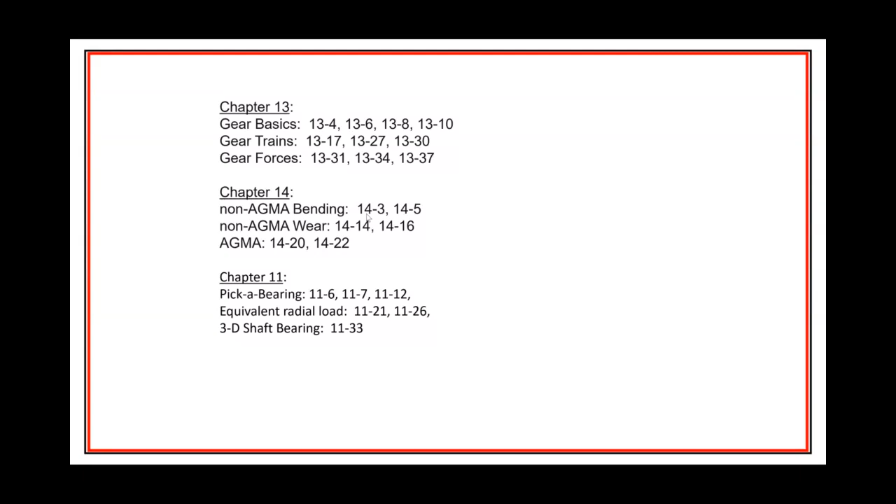All right, so these are the problems. Yeah, okay, so I have the problems listed out from the suggested ones. And boy, the clarity isn't all that great, definitely not very good resolution.

Definitely not doing this problem. Okay, so we're not doing this problem. It just happened to be on the list, man. I was just using the list.

This is a challenging one right here for planetary gear. You know, planetary gears are on the table. Another planetary gear, also a challenging one. I think the big challenge is trying to figure out what this diagram means. That's the hard part.

I'm just going to cycle through these, kind of see what this is, the menu, and then you guys can make requests if anything jumps out at you. So maybe consider that as we're walking through. Once again, I just tried to pick out some problems where I thought, hey, this would be the kind of thing that I want you to be able to do, but not necessarily representative of this is the exact problem.

If you've had me before, you should recognize that I don't just give away exactly what you need to do for the exam. If you want to prepare, the question is can you do something.

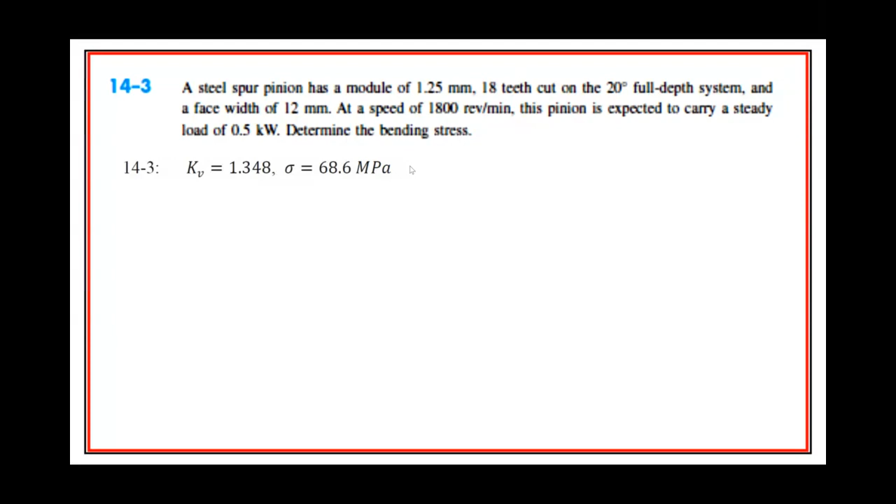So I was talking while going through some of these. There's usually chapter 4, so there's a chapter 13 thing, and yeah, this is a sort of basic problem. We did several problems kind of like that. Here's some stress problems, and this one you could do either way with AGMA or non-AGMA. Same thing true with this.

There's another stress problem. Look, Osama's got his hand up. Sir, where do we find these slides? You find them right here, my friend.

Okay, so they're not in Blackboard? Okay, yeah, well, they're problems that are going to be... let's see, I'll show you where they are. I'm sorry, I was just joking around, man.

Right in the beginning when I started here, let me see. I'll try one more time there, Nathan. Let's see what happens here. I apologize, Nathan, I just don't know what's causing that.

If you go here, bring it over here, boom, and if you go to exam prep, these are the problems right here. So that's what I'm doing right there. So you don't need the slides for them because you have the book, right? That's these are the... what is that thing right here? You have 151 registry issues on your PC.

That's great, thanks man. And then we also have answers, right? So there's the ones that say, yeah, okay, so these are suggested problem answers. And here's a suggested problem. So you get those from the book, and here's the answers from right there. So that's what these are.

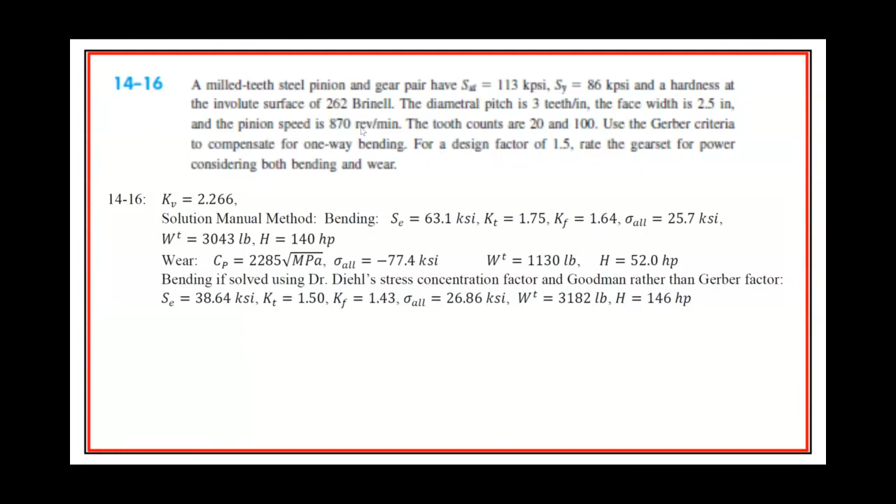Yeah, I think this is an AGMA problem. Could we do one of the planetary gears if we want to start? Okay, absolutely.

More spur gear stuff right there, an AGMA method.

So we got some bearing problems going on right here. And this one I just threw the answer right in there from the solution manual. I'm doing it right there too. Anyway, so we can look through some more of this.

I was actually looking for, okay, here's exam practice problems, right? So can we do one that consists of FBDs, maybe like 3-D shaft? Yes, absolutely.

Let me go back up to, sorry for the delay here.

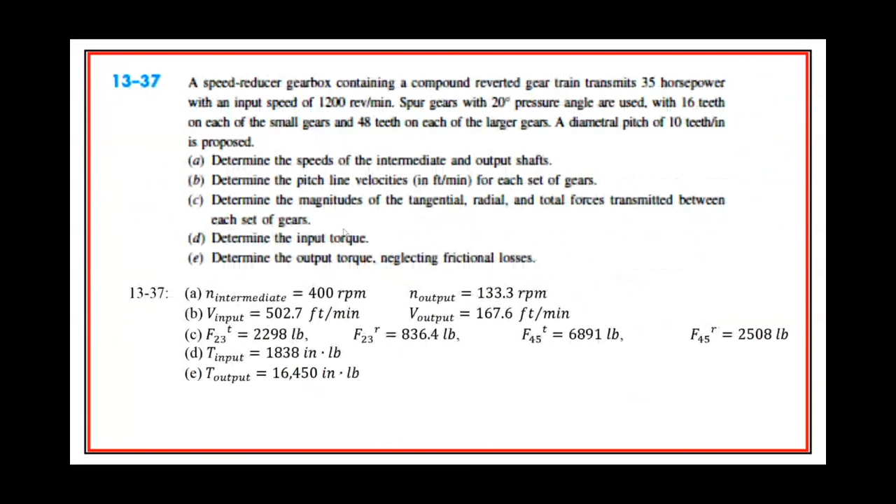So let's try one of these challenging planetary gears from the textbook. There you go, one of these two right there, this one and this one. They don't have a whole lot of them.

So I'll try this one. All right, so the gear numbers for the gear train that we see right here are 20 teeth. For this guy's got 20 teeth, and this one has 16 teeth.

As we're going through here, we want to check out some of the diagram here. You can see there's a dashed line like right there. That means that this is spinning freely on this shaft, right?

And then it goes to gear 4, which has 30 teeth. But you can see because of this little fillet right here, they're implying that this shaft and gear spin together. And then you can see the dashed line through here means that this gear is attached to, so 4 and 6 are fixed onto the shaft and they'll rotate together.

And 6 has 36 teeth, and then we come down to 7 right here, and you can see from this dashed line that this shaft spins through 7, and you can see from this little black gray area right here that 7 is actually fixed, right? And 7 has 46 teeth.

Do I not have this written down? Okay, well, we'll just have to move this thing over. Well, I gotta see, probably I'll bring it over here.

All right, so I don't necessarily have to draw the whole thing out, but I like drawing things out to help me think my way through the problem.

All right, so let's see, this has got 30 teeth, I'll call them T's. And this is 6. All right, so this is 4, and this is 6, and this is 36. And it's going, here's the carrier for the thing.

And then they have this gear right here, and he rotates along those lines. And coming through here, and then here's, I kind of made the thing too big, so there you go.

So this one is fixed, and this has what, 46 teeth, and this is sort of the shaft that we want. And lastly, we have a gear that looks like this right here, and he's right here.

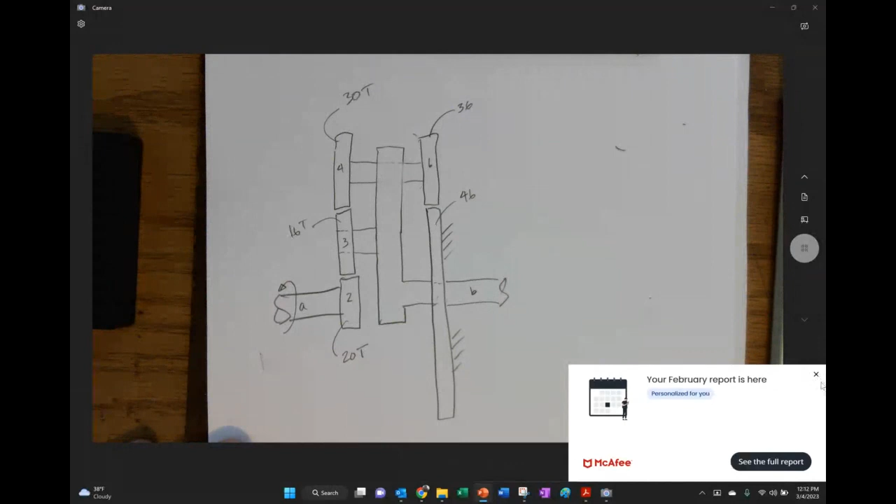So I'll say that this NA is 10 RPM. So I'll start out with my E and march through, right? So there's my first gear. And so we say that's going to be, this drives this one right there. So N3 is driven, and then 3 drives 4.

And then 6 drives 7, even though 7's not rotating, right? That's just the way that we're referring to the thing. Noteworthy that 3 would cancel each other out.

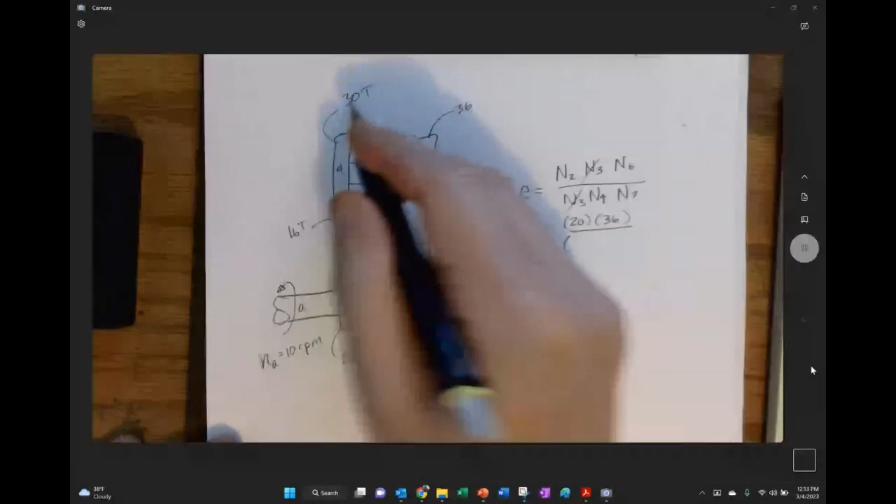So you take 20 teeth times the 36 and divide by the 30 and divide by the 46. So: 20, 36, 30, 46. And we should have 0.5217 as our gear train ratio.

And now we want to go to our book in chapter 13 under planetary gears, or actually I'm not sure there is a planetary gear section. I think it's just in gear trains. And there you go, and we have our main equation here at the bottom.

This guy right here, I'll write him down: E equals NL minus NA divided by NF minus NA. And now we got to see how that applies to our situation.

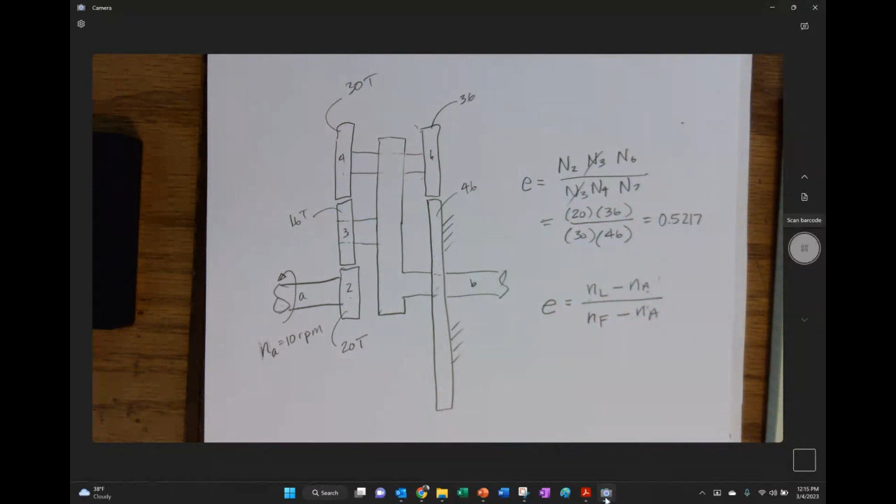Well, the last gear in this train is going to be the 7, even though it's not rotating, so it's going to be 0, right? And the arm is actually this output, you can see that's the arm onto the thing. And so this is the input right here, the first. So you got first and last.

So we go 0.5. Oh, we have to decide. Oh, by the way, we need to assign a sign for this, right? So we have to decide, is the input and the output turning in the same direction? Because the sign of this will affect our result.

So what I've been told is you hold on to the arm and then you see which way the last gear would rotate, and that determines the sign of this, right? That's like a rule of thumb approach to this that I've heard from multiple sources. I think it might be said in this book, but it's just a good way to remember. So hold the arm in place and see which way the last gear would rotate. Even though this is fixed, we're only doing that for the sign here.

So if this was fixed, all right, let's just march through this and do the little thing. You have to kind of picture what this thing would look like. I could try to sketch it if that would be helpful, but they're going to be superimposed on top of each other.

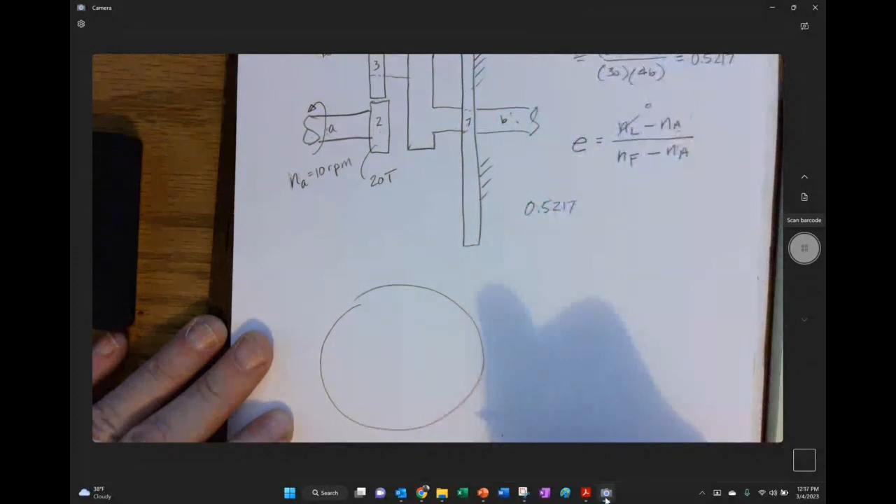But if that was gear 7, sorry, I never labeled it 7, right here, you would see that we'd have, I'll make this one much bigger, that would be gear 6 right up here. And then of course gear 4 would be right here, right? And they rotate together. Gear 3 would be right here, and then gear 2 would be right there, right? So hopefully you can picture this.

So I wrote, this one goes this way. This is 2, and this is 3. This is 4, this is 6. Where did 5 go? Oh, they numbered the arm for some reason. I don't know why, don't ask me why.

All right, so we could see that 3 would go clockwise. I'm assuming 2 is going counterclockwise, and I'm looking from this direction, by the way. Right, so this is going that direction, so this has to go that direction. And therefore, you know, I'm going to draw the arrow.

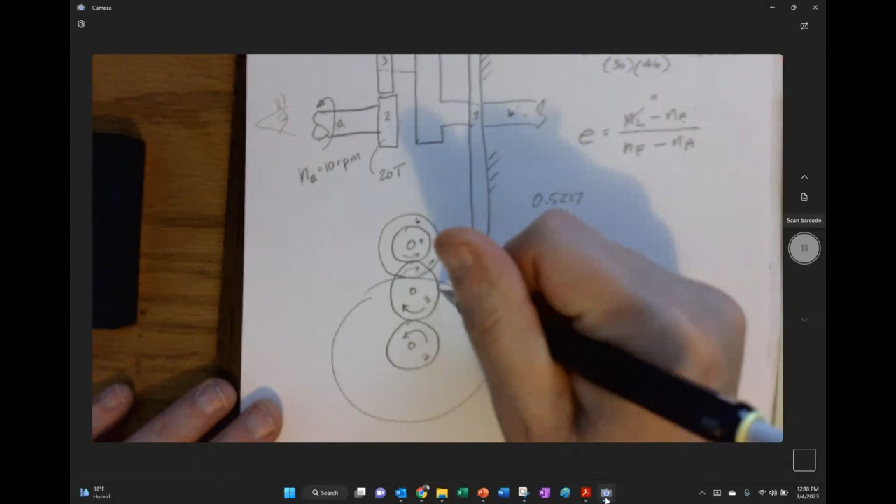This is the arrow for 6. And then, did I do that correct? I'm starting to think I did it correct. It says, oh no, okay yeah, we're okay. So here we go. So this actually should go in the opposite direction of this, right? So I think I did that correct.

This is the way to assign the sign for this thing. You could also see, by the way, because we don't have another, and so we're saying that's going to be negative because this goes the opposite direction right there. So we've decided that must be a negative value. So when we go down here to plug it in for E, we'll make it negative.

Another way that you could do it, because this does not have a gear with internal teeth, these are all external teeth, it would be true: there are 3 stages of gears, and every one of them is negative. So it makes sense. You have negative times negative times negative, and you get a negative result. So that is also true.

What messes you up in that respect is if you have internal gears, right? Like a ring gear, that does not behave the same way.

All right, I can't see at the same. I have 2 monitors, but I'm using both of them at the same. So let's see, could you do? Okay, can we do one? Or are you putting your hand up? I can't tell. Okay, like for an... did they tell us the shaft B doesn't rotate, or we assume that?

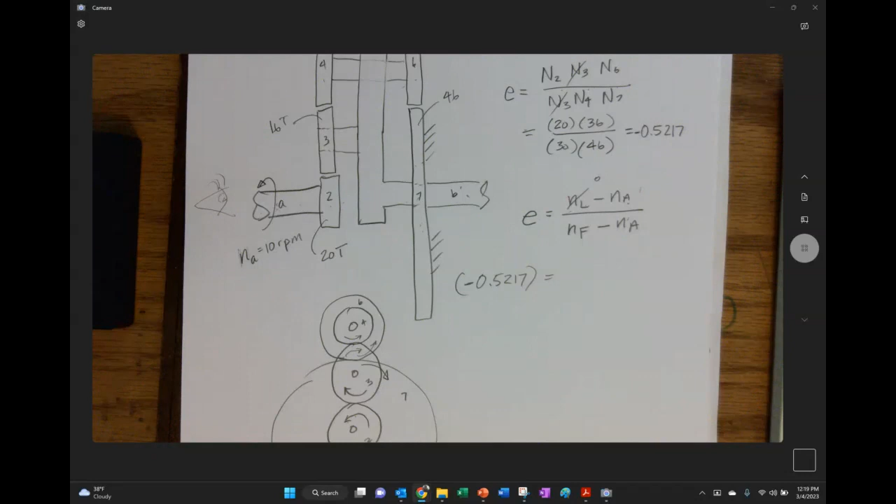We tell that shaft B does not rotate. Okay, shaft B does rotate, but for the purposes of trying to apply the equations that we have for this, what we do is a hypothetical. Let's pretend that it rotates, even though it indicates that it doesn't, in order to establish what the gear train ratio is going to be. So we determine whether it's positive or negative, as if it could rotate.

And now we go ahead and we apply what actually is taking place with the gear train equation.

So now we have that negative, we can go 0 minus. This is the thing we want, right? The arm. And first we're going to say it goes 10 RPM, and we're going to go to the arm again. Now we have a little bit of algebra to do, and I'm not really great at algebra, so I usually don't trust myself to skip steps. I will methodically go through this.

All right, are you putting your hand up? Please go ahead and put your thing in the text, I don't know. You could do that. All right, doesn't matter, I just can't quite juggle these things sometimes. Just two monitors, and I need to look at one of them.

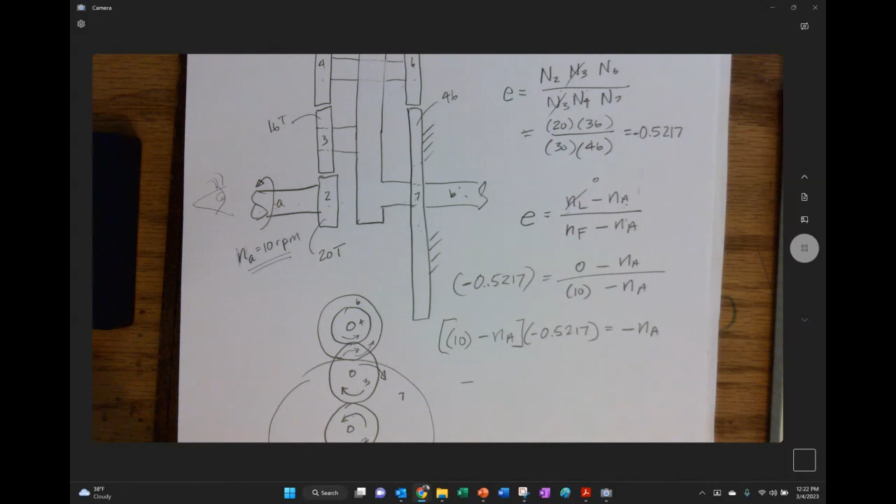Well, I just didn't like the way the problem asks, if you turn it 10 times, how many times does A turn 10 times. I'd rather think of it in terms of RPM, so I just gave it an RPM instead. I've seen students get confused because we only did a problem where we turned it 10 times, but now you're asking for a speed. And I'm like, all right, it's a speed. I can't win, I'll confuse everyone no matter what.

So this comes out to like 5.217 plus 0.5217 equals negative NA. I needed NA right there, so I bring the thing over to the other side. So we got minus 5.217 equals, and now we're going to have minus 1.5217 NA. Did I do that right? You guys can catch me anytime you want, please, to tell me if I screwed it up.

But now, okay, that's good news because we know the answer. 10 times that and flip that guy over and add 1 to it. Boom, and then divide, and do we get a positive 3.429? Call it RPM. And the slide we had, bring it back over to the other screen here. Yep, we got the right answer. Woohoo, off by a decimal place.

But anyway, so that was sort of the general process. We could do another one real quick because they're not long problems, just to try to organize how you approach this. I should go back. Okay, does anybody have a question about the one we just did?

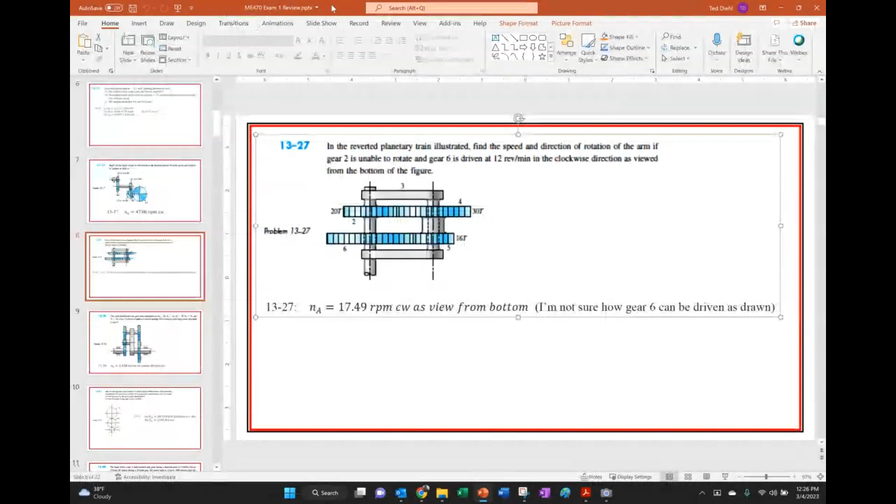But gear 6 is being driven in the clockwise direction as viewed from the bottom of the figure. So I'll try my best, it's a weird one. It's a weird problem.

So what was this previous problem? I should label these things. This was 1330, so I'll label that 1330. I'll put you up here. So what is this? 1327.

I don't like this problem at all. Try to draw the thing out, this helps me think. I'll draw that as a thin line right there. So there's the arm, start out with the arm here.

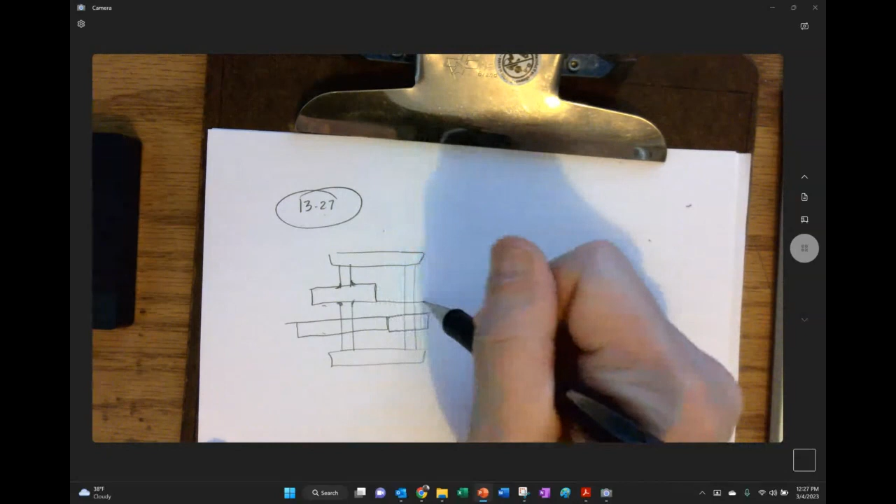And we have gear 2, which is moving with this shaft, right? So they show like a little thing right there to indicate that gear 2 is attached to the shaft. And here's gear 6 - well, I didn't make it big enough here, it'll have to do. And then you have this gear and this gear, but they are attached to this shaft right here.

And you almost have to erase some of these lines here. All right, so this is 6, 2. Here's the shaft, and now I've often thought that this should - I feel like it should be, but I think this is connected. They didn't put the little symbol signs on there to make it look connected, but this is definitely connected.

And I'm regretting picking this problem. This guy is rotating through here, he's number 5, and here's number 4. And this guy has 16 teeth, he's got 30 teeth, he's got 20 teeth. And they didn't tell us how many teeth 6 has.

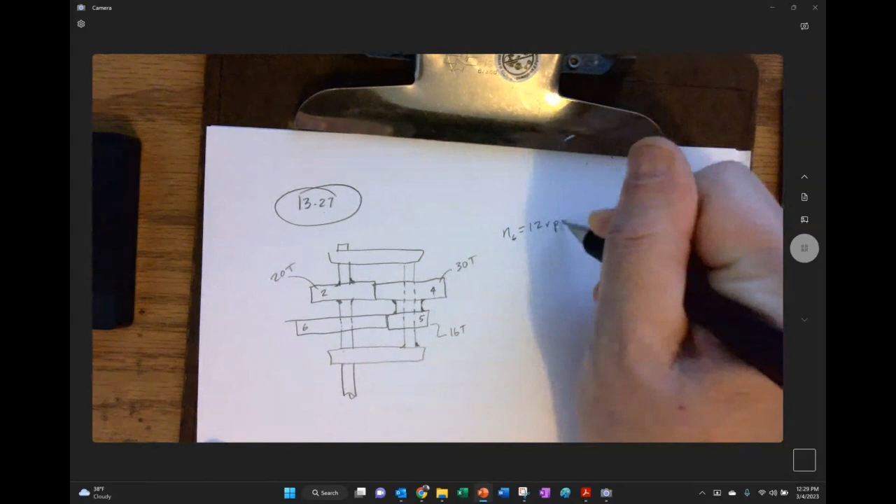The plan is to find the direction. N of 6 is 12 RPM, but I think we can figure it out. Okay, so they didn't tell us the number of teeth of 6, but we can figure it out from teeth math, right?

So the difference between here and here, if this has 20 teeth and this has 30 teeth, then there would be 10 teeth - or you could think of it this way. By the way, the teeth math, recall that if we pretended that the pitch was equal to 1, then the diameter would be equal to the number of teeth. Are we okay with that?

Would you like me to repeat that? You're going to pretend P is equal to 1, therefore N is equal to D, right? So if we're doing that, we can pretend that this 20 teeth means that this thing is 20 inches in diameter. That means there's 10 inches right here.

And that means that this is 30 inches in diameter, so that's 15, right? So the center to center distance between these two shafts must be - well, you could do it this way, you go 20 plus 30 divided by 2 right there. So anybody want to help me out with that math? It should be 25, right? That's 10 and that's 15.

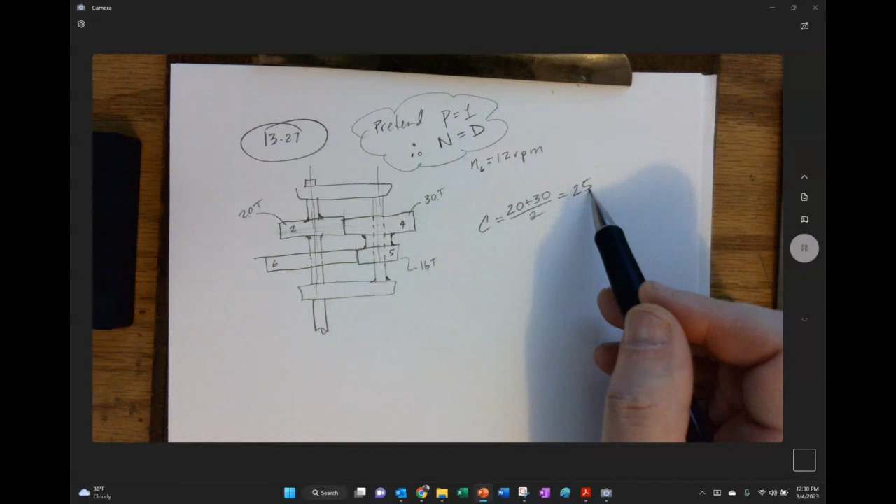Yes, yay. So this is 16 teeth right here, therefore that's going to be 8. So therefore, 25 minus 8 is going to be 17. Is that right? Therefore, yep, the number of teeth is going to be 34. Did I lose anybody on that?

So here we assume that n equals d, just to make life easy. I'm only suggesting that's a good way to think of it. We could write it out the long way, but I think it's better when you assume it like this—it's much easier to solve, much easier to just consider it in those terms.

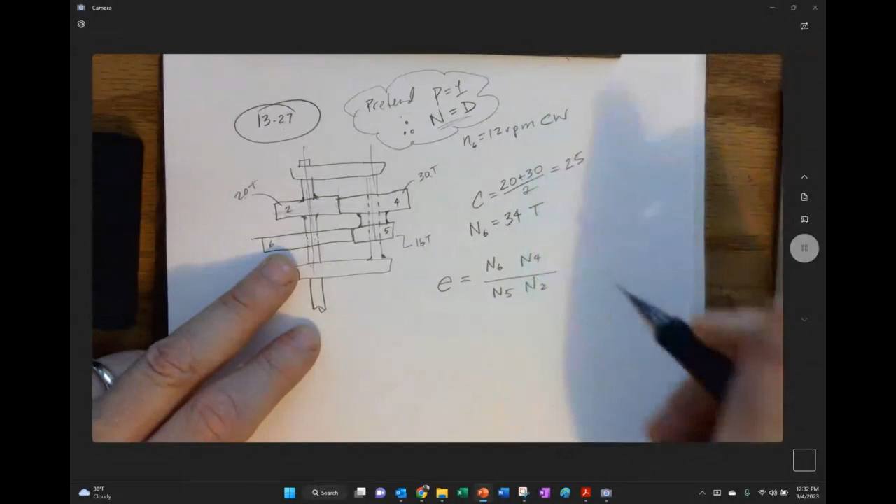Before I forget, this is clockwise. So let's look at the gear train ratio coming through here. Since they described 6 as being the input, we'll say that's where it starts. So 6 is going to drive 5, and then 4 is going to drive 2. So we can have 34 times 30 divided by 16 and 20.

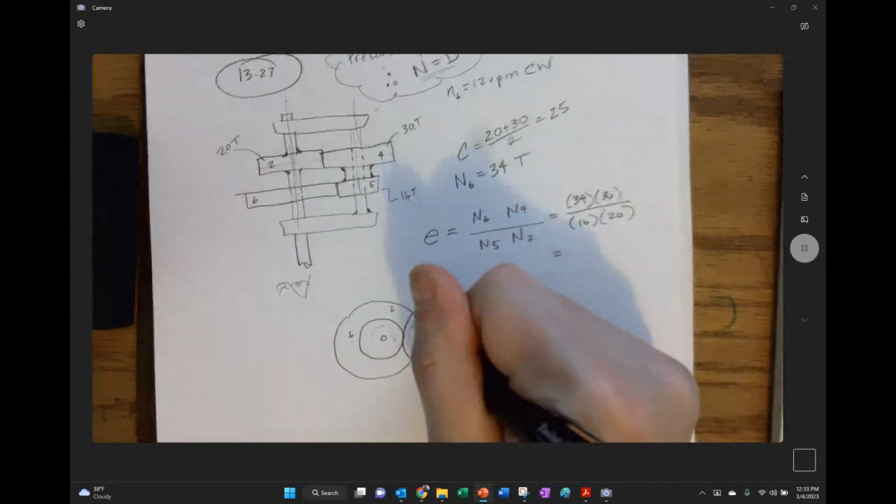We're going to play that same game we did before—let's look at the diagram from this direction. It's a little weird, but we could take a look: here's 6, here's 5, here's 4, and here's 2. They're saying this is going clockwise. It's 6 that's actually moving, so 6 is going that way, therefore 5 is going that way, therefore 4 is going this way, and therefore 2 is going that way.

So input equals output, therefore this one's going to be a positive value. 34 times 30 divided by 16 divided by 20 is 3.188.

And then we use our main equation right here—once again, with my short attention span I have to look at this thing again. Let's see what's being held in place. 2 is unable to move, right?

So find the spin direction of the arm. It must be...

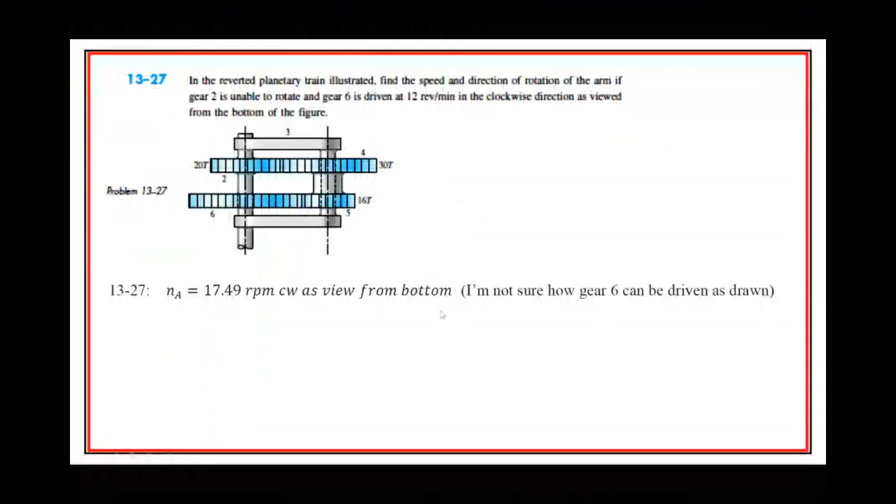I'm a little frustrated right now, just one second. It must be that this shaft passes right through there, and it passes through right there. Take a look at the image again—I'm actually sorry for picking this problem, it's Shigley's fault, not mine. But you see that gear 2 is definitely attached to that shaft, right? We're all in agreement. And if 2 can't move, you don't see an attachment like that thing right there.

That's implying the shaft is attached to 2, and there isn't any right there, so this arm must be able to rotate—you see it's not there as well. They really should be drawing dashed lines through right there. Other instances show that thing right there and right there, indicating this shaft is attached right here, but this one's not. So in my opinion that's an indication it can rotate.

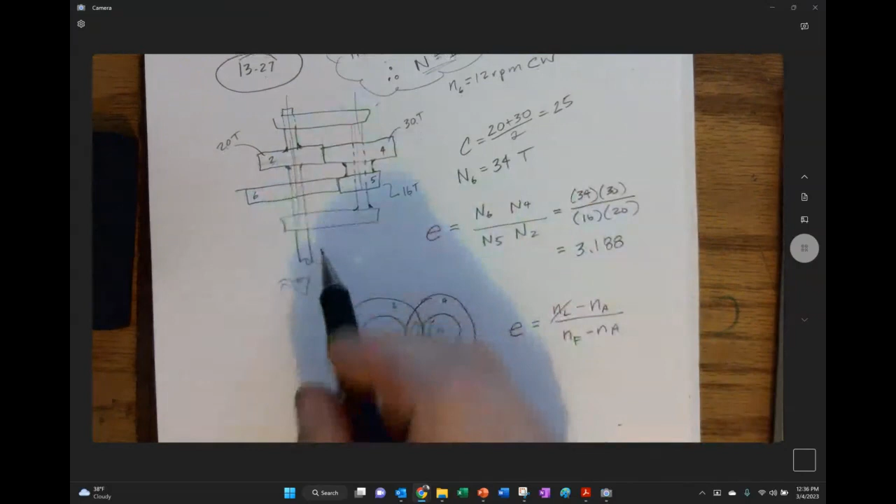So anyway, I'm going to consider 2 the last gear, since I started calculating with 6 and ended up at 2. So that's the way I'm going to go with it. 2 can't rotate, 6 can—we'll call that the first, and it's the arm we're trying to find. So we'll say 3.188 equals 0 minus the arm, and this was the 12 RPM and the arm.

We've got to do the same thing again right there—we're going to go 12 times 3.188 minus 3.188 NA equals negative NA. So NA, which is the arm, we're going to have 12 and then 3.188, and it's going to end up with a negative value. We're going to add it onto there, so divide, and I get 17.49.

I'm not feeling a high degree of confidence that I didn't screw something up along the way. Oh, but I got it right—and it's negative, so it's going to be counterclockwise. Oh no, clockwise. I'm not sure how gear 6 can be driven as drawn—yeah, that's me saying that in the past right there. Clockwise.

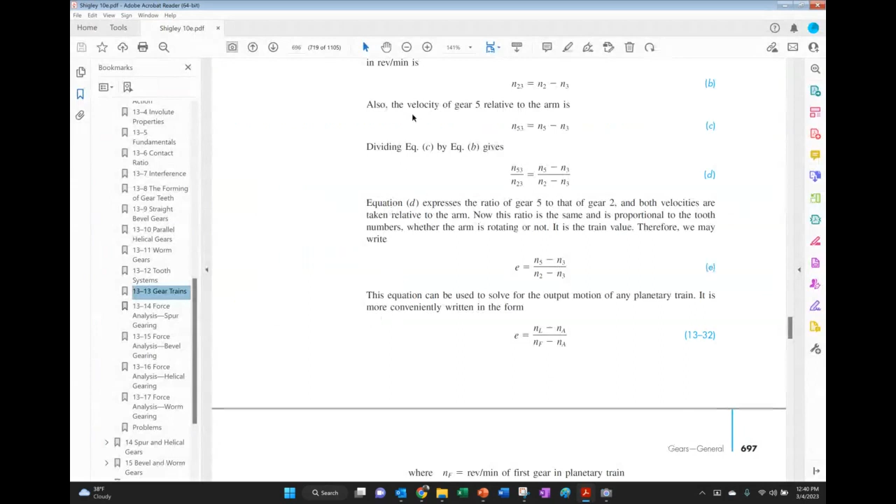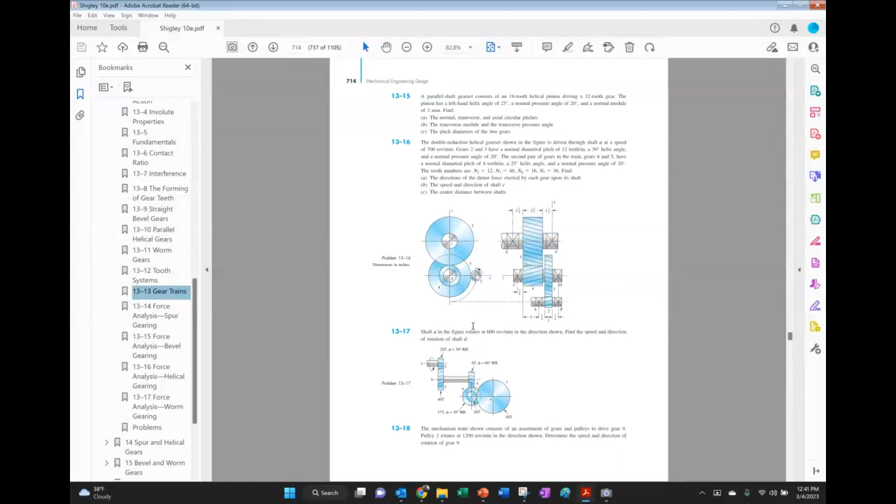Can you do a non-AGMA problem? You want to do an AGMA problem? Okay, we'll do that. We were just doing the forces right now, but we could actually kind of invent our own AGMA problem if we wanted to out of one of these. Are we okay with doing this problem? No, I would rather do a more complicated problem, I want to do a problem from the book or from your old exams.

Okay, we'll do this problem. So I'm looking through the past exams, like is there a better problem than this one? I don't know, it's hard to say what better is, but yeah. I mean, some of the problems I wrote, some I just got from other books. I'm not saying I did a great job, and there are problems.

Let me see if I can, I'll scroll down, I made this file too big. I'm looking at my problems. Oh, I actually did this one before, I actually used this one. Well, I guess we'll go with it, why not? All right, so let me go back up. Sorry for the wasted time. Try not to waste any more. All right, focus. There you go, focus.

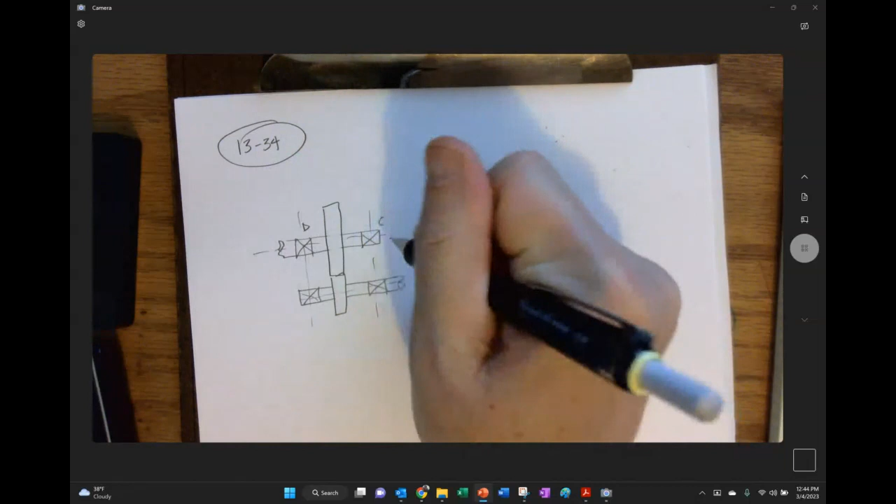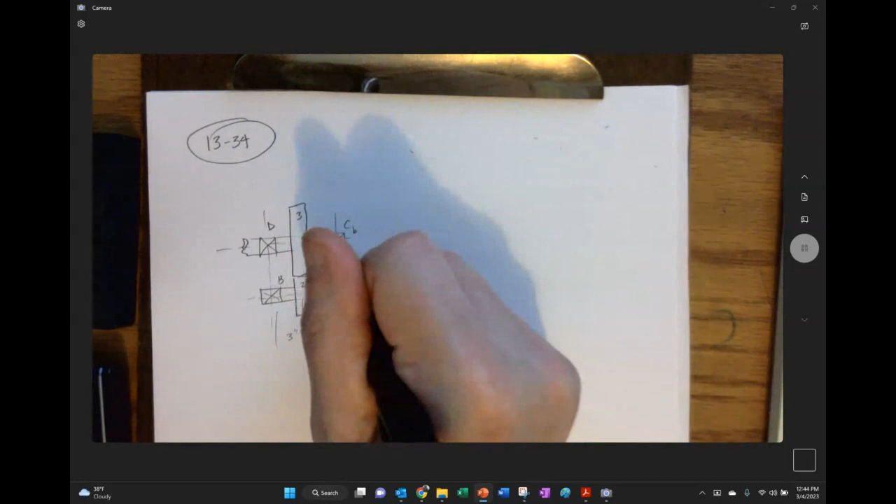All right, so what do we say? This is D, and this is C, and this is shaft B, and this is shaft A, and they're saying the torque is coming this way, and this is in, and this is shaft, I guess this is the label over there, B, and I guess this makes this A. And this is 3 inches and 3 inches. And this is gear 3, and this is gear 2. How come there's never a gear 1, is what I want to know. Someone needs to do some research, please, someone do some research and tell me why. So this is 18 teeth, and this is 45 teeth.

And the power, H, we use H in this book for power for some reason, I guess maybe for horsepower, I don't know, H, weird number. And an input of 1800 RPM, and that'll be A. Find the direction and magnitude of the forces at the bearings at A, B, C, and D.

All right, so first, there's a bunch of different ways that we could start this. We might want to find the torque, or we could find the force, right? And in our book we've kind of done it two separate ways. When it came to this force section, they decided, at least in US units, to find V and then find the WT from that. So I'm just going to show you quickly the differences, or how to do it both ways, and you could do it either way you'd want to try to get the forces set up right here.

But first we need to know the pitch, right? They told us it's got a pitch of 5 teeth per inch. So the pitch is 5 teeth per inch.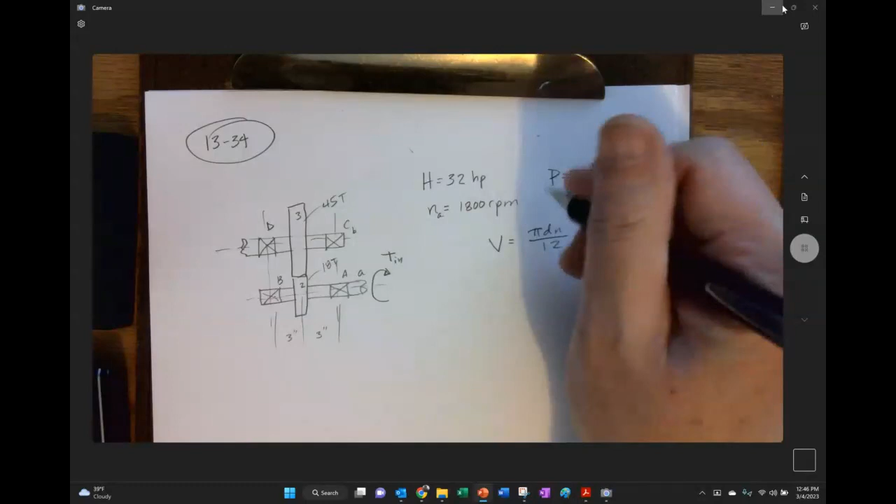So we need to know the diameters of the two gears. D2 is going to be N2 over pitch, which is 18 over 5. 18 over 5, so 3.6 inches. I didn't leave myself a lot of room here, I'll just squeeze it in.

45 over 5. I should be able to do that in my head, but I'm going to calculate it anyway because I don't trust myself. And I was wrong. Terrible at math. Just terrible at math. Somehow I've been able to manage.

But anyway, when you go to find the pitch line velocity, remember that you want to use the same diameter with the RPM, right? So this is the shaft, or the gear that's rotating at RPM, so you use that diameter. So we get 3.6 inches, 1800 RPM, divided by 12, and that's going to get us a pitch line velocity. 3.6 times pi times 1800 divided by 12. Boom. 1,696, and these are feet per minute.

And then we go back to our book because I don't trust my memory, and we could have WT, which is a subscript here and later gets turned into a superscript in the next chapter for some silly reason that I can't explain. I'm sure there's some reason for it.

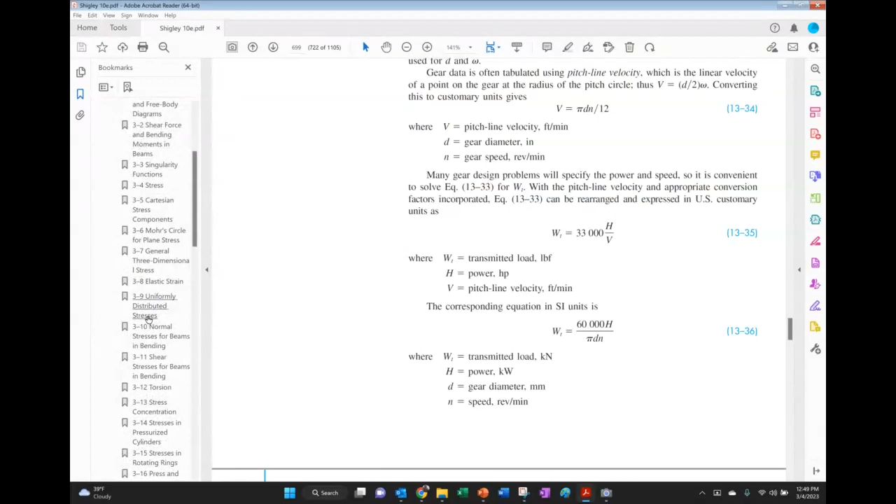That's one way that we could approach this. Another way, I almost kind of prefer this way, to tell you the truth. I like taking the torque instead, and that's under chapter 3, under torsion. I mark this one in my book because I use it a lot right here, and you can see that we have this equation right here.

So I like this one right here with the 63. So we could find that H is equal to TN, torque times RPM, divided by 63,025. So we could find the torque by taking the power, which is 32 horsepower, and multiplying it by 63,025, then dividing it by 1800, right? Torque, and 32, 63,025 times 1800, divide. We get a torque of 1,120. These are inch pounds.

Is it not Tn equal to T? Tn is equal to horsepower, right? Yeah, shouldn't be horsepower times 63,000. Yeah, 32 times 63,025, divided by RPM. Why did we divide it by RPM? I'm trying to find the torque. I hope that makes sense. Trying to find the torque. I'm just trying to show you, here's an alternate way to try to find this.

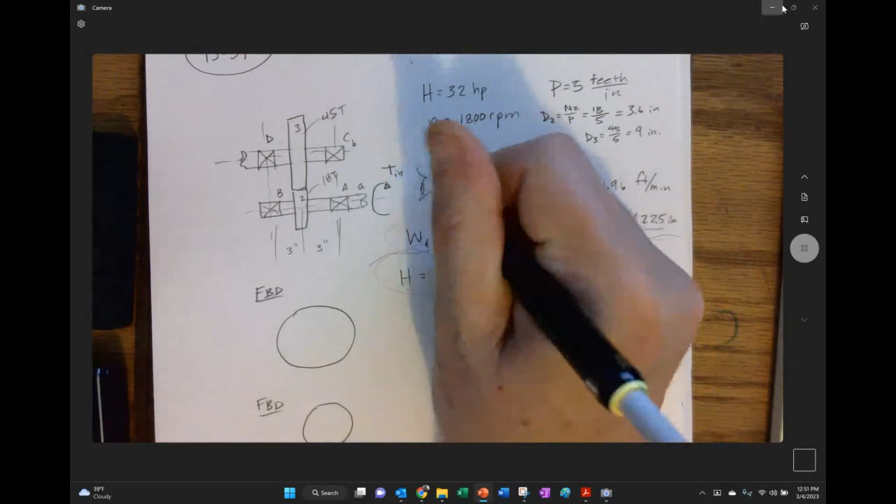But if we were to take a look at our free body diagram, right? So we have a free body diagram here and a free body diagram there. And I've decided to look at it this way right here. I hope you don't mind, I just made that decision. Because on here, they're showing the torque going that way.

Therefore, we're going to have a force right here, this force, and if we're going to label it correctly, it'd be F. This is 2 and this is 3, so this is 3 acting on 2 in the tangential direction. And I got to make enough room so they could be underneath that one. So I'm going to F3 onto 2 in the radial direction. Could you explain how we know F3 on 2 tangential goes to the left in this point of view? Okay, so this is going clockwise, right?

Yes. This is T, and we can call this A acting on 2, that torque. So if we do the sum of the moments about, I guess they did call this X, and they called this Y up above. So sum of the moments about the X axis is equal to 0, and we'll consider counterclockwise as positive. We'd have negative TA2 plus, well we need a plus, right? So this is going clockwise, so this has to go counterclockwise to be able to balance it out.

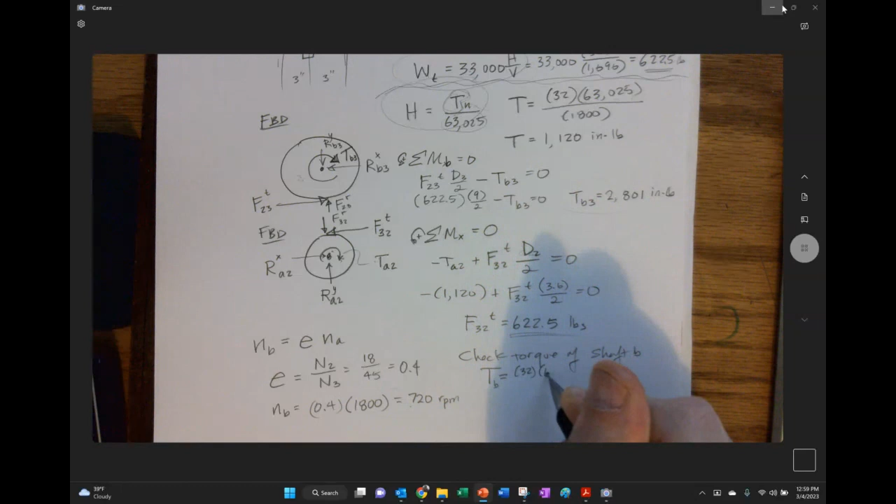Notably, if you wanted to double check our torque up here, you could come back here and do the same thing that we just did a minute ago and check, right? And you would see that we would have like 32. I'll do it here. You go check torque. Check torque of shaft B. And TB is going to be 32 times 63,025 divided by 720 now. If I did it right, that is. I'm not guaranteeing nothing at this point.

Oh, look, yeah, 2,801 inch-pounds. All right. So the mission of this problem is to find the direction and magnitude of the forces on these four bearings. I don't think we necessarily need to do all four bearings, but not too terribly.

Are you gonna upload the notes like you wrote later on? If you want to, yeah. I didn't write everything because I tried to follow you more, I got you, understand it, I got you. I'm sorry if I'm going too fast. No, it's okay, sir, thank you. You're welcome.

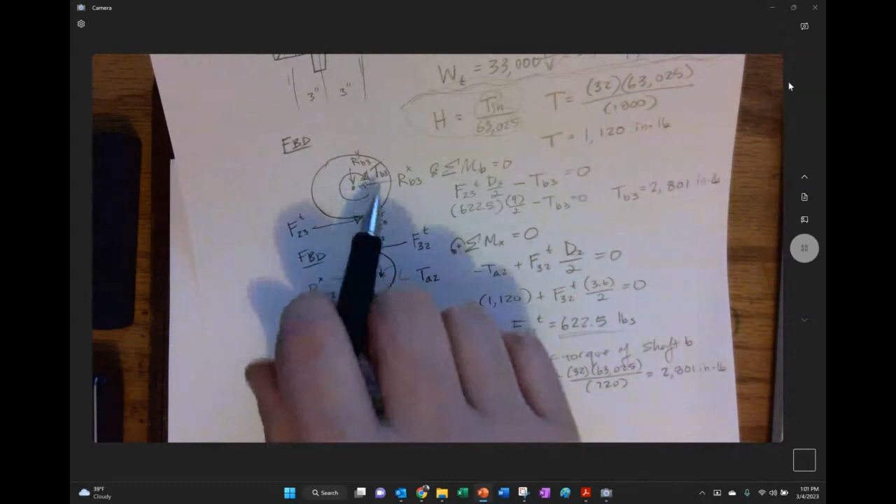Let's see, okay, so what we need to do, we have a setup right here. We want to try to draw an FBD. Actually, there's a sort of trick we can do in this one, a shortcut, but we won't necessarily do it. We could do the shortcut because this thing is on a... there's one thing we haven't done yet. We didn't get the radial forces, right? We got the tangential forces, but didn't get the radial forces. But we could do that here.

So the radial forces, they're going to be equal to each other, right? The 3-2 radial equals the 2-3 radial, and it's just going to be the force 622.5 times the tangent of 20, because that's the pressure angle. 622.5 times that, and so we get 226.6 pounds.

So either shaft, actually, we'll pretend there's a coupling over here that makes it so the up and down and side to side load doesn't get transferred onto this thing, but torque does. I guess this is the output one that I just drew over on that side. I like to make them side by side.

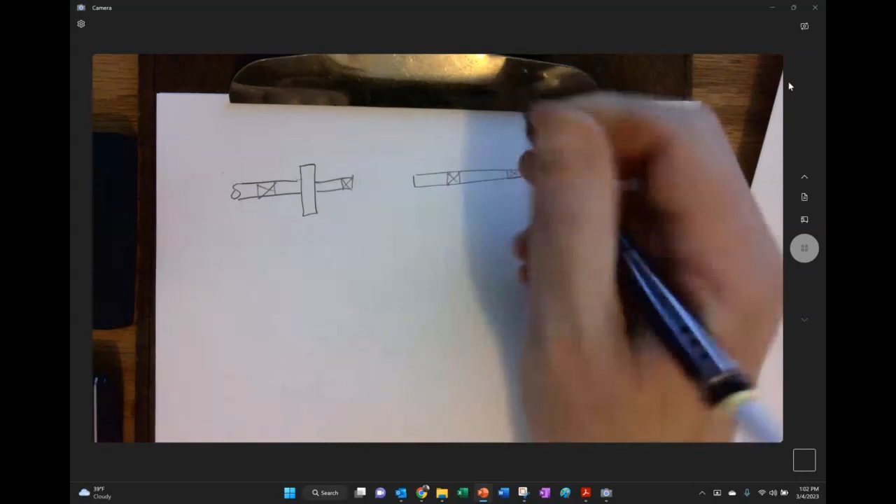And here, is this just where we do a shear moment diagram? Well, we could, but we weren't asked to do the shaft design or get the shaft, so we don't necessarily need to. But this is where we would start doing it if we had to. We go ahead, and this one is going to be the Y direction, and this is going to be the Z direction. We're going to set it up, because let's see over here.

We want to get these reactions, but it's a really simple one because they're symmetric, right? It's 3 inches and 3 inches. So you're just going to take half of the force and place it on each side. You can almost cheat and skip the whole thing, but we'll pretend it's difficult.

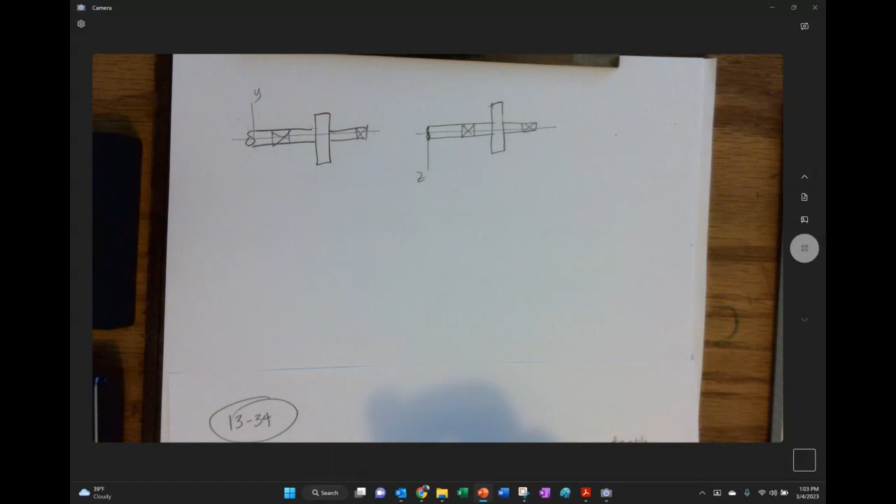Let me, one second. Okay. So the only challenge here is to just make sure that we're putting the forces on here. So I started with this one.

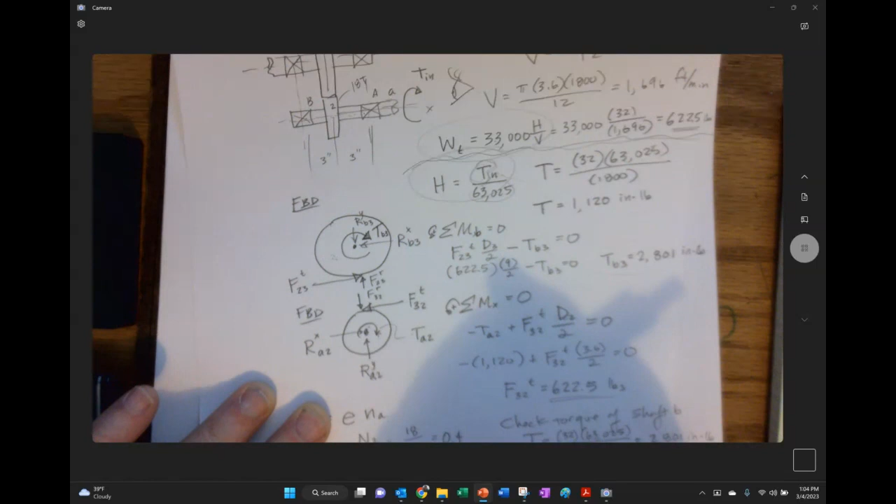So in the Y direction, it's going to be this F23 radial, and in the Z direction, we're looking down onto the thing, and if you're looking down on it, Z is pointing to the left, so this is going to the right. This is going to be right here, actually underneath this gear, and that'll be the F23 tangential right there. But we're just going to have reactions right here, and that's why I kind of wish I didn't use R's in here, because this is actually the force the shaft is feeling, but that's okay. We'll call this RD-y and RC-y, and then this would be RD-z and RC-z.

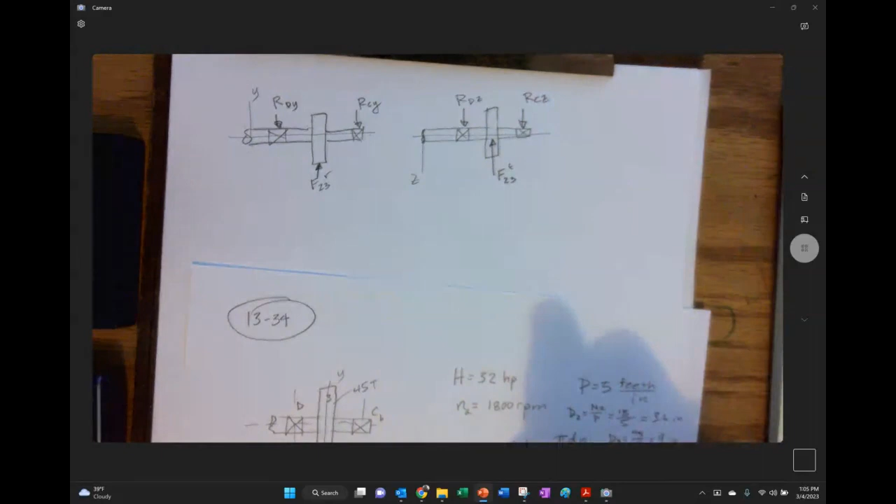And then these dimensions are both 3 inches on either side. So summing the moments, it's kind of ridiculous to do this, but that's fine. All right, we'll sum moments about D. So we're going to have a negative RC times 6 plus, because that's going clockwise and that's going counterclockwise, plus this radial force, which is the 226.6.

So RCY is going to be... it's supposed to be times 3, sorry, forgot my moment arm. It's 3, right? Because we're doing it around here, so it's that times the distance. So we're really just dividing it by 2. Duh. 113.3 pounds.

And then if you were to do this as we typically would, we'll find the other one, and we'll go negative RDY plus 226.6, minus 113.3 equals 0, sum of the forces right there. And then RDY is 113.3.

Kind of silly, same thing true here, where this is 622.5 right there, right? So by inspection, don't be like me kids, this is bad, don't do this. You could say that RDZ equals RCZ, which is just going to be 622.5 divided by 2, 311.3, call it, pounds.

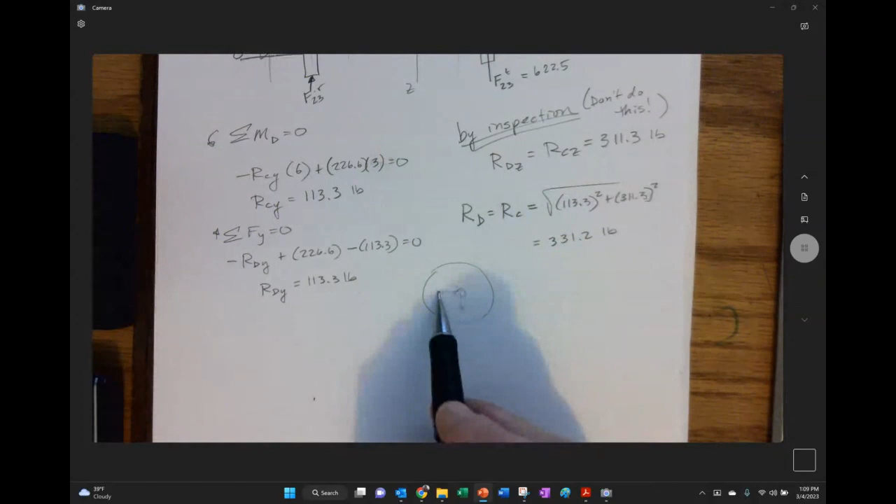And truth be told, that's going to be the same thing for the other set of bearings. They're just going to be pointing in a different direction. So if you wanted to take a look at what that looks like, take a look at that bearing right there, the reaction that's happening right here. In the y direction, it's going downwards. And in the z direction, it's going this way. So that's going to be a force that looks like that, right? And that's going to be the bearings acting on the shaft.

So if you were going to go the other direction, the load that's actually on the bearings is actually going to be in that direction right there. And it would be, let's see, the Z is the larger of the two, so it would be the rise over run, 113.3 divided by 311.3, inverse tangent. So you have almost pretty close to being 20 degrees. Does anybody recognize why that is? Should be 20 degrees, right?

That's the pressure angle on these two gears right here, right? We have these two gears, and here's the line of action right here. And the actual load, the actual force that's being applied there is this right here. This is the total force, the W. Of course, I'm violating my own rules by showing a force arrow without doing a free body diagram here. But here's the total force, right? That's broken down into parts right there, right?

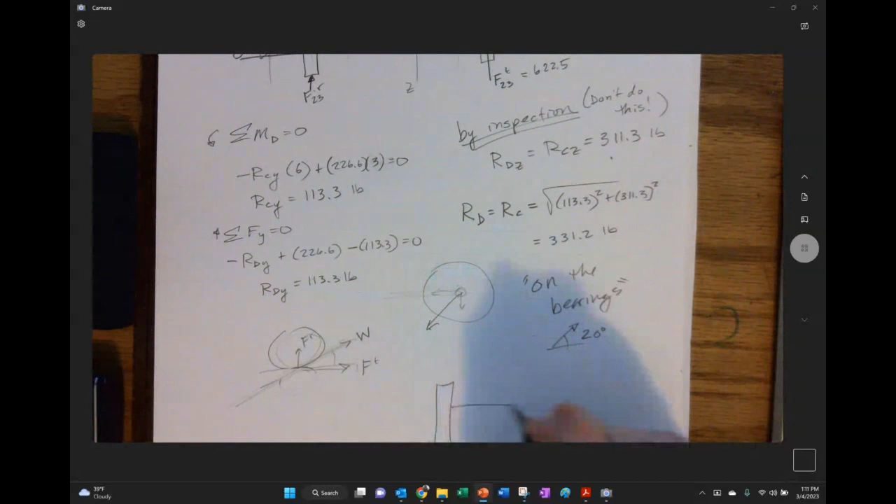So here's that same shaft that we're doing right here. I don't know if this is really good for exam prep, because this is just information you'd want to know, right? That we could just have, if we're drawing, looking down perpendicular to the plane in which the total force happens onto the thing, we'd have this W right here, which is of course going to be, could do it a couple different ways.

Maybe the easiest, I'll just go ahead and take the square root of the radial and the tangential together, that's the total load onto the thing. You could also just divide that by the cosine of 20 degrees.

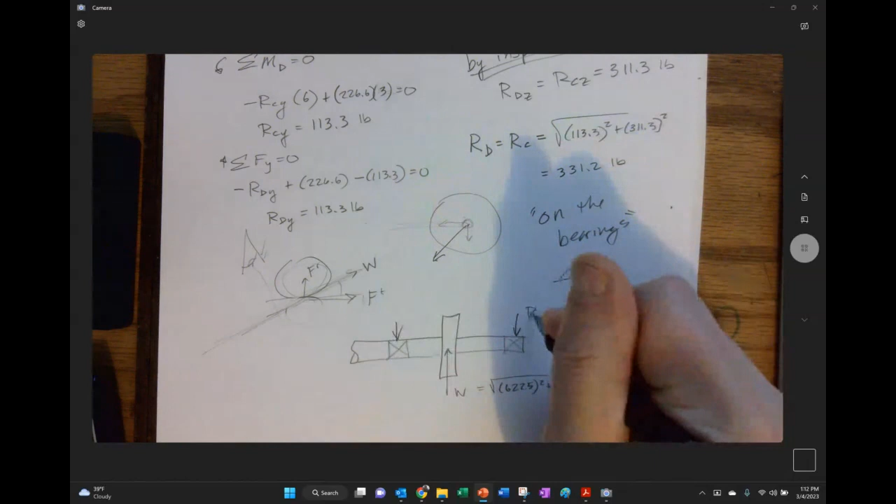622.5 squared, 226.6 squared, square root them, and you get 662.4 pounds. And of course, you're going to have the bearing reactions at D and C, and they're just going to be half that. So they equal 331, right? Which is what we had right here.

So when I said that this was sort of an easier problem, when I'm looking at this I'm going, this is actually a pretty easy problem. It's because of the symmetry. It's also because there's only one gear on each.

In our case, sir, do we need to do the last few steps you did? Oh, no, not at all. I'm probably, it's probably a mistake for me to try to teach during the exam review session. So I was trying to show you a bigger picture of what was going on. Okay, thank you, sir. Let's try to do stuff that actually will help you prepare.

All right, so you asked for an AGMA problem? Yes, sir.

Okay, so you have to concede that AGMA problems can be pretty long. So we're not gonna dwell on a thing here.

One second, I'm just trying to see what kind of problem it's going to be. Sure, let's do this one. Problem 14.22.

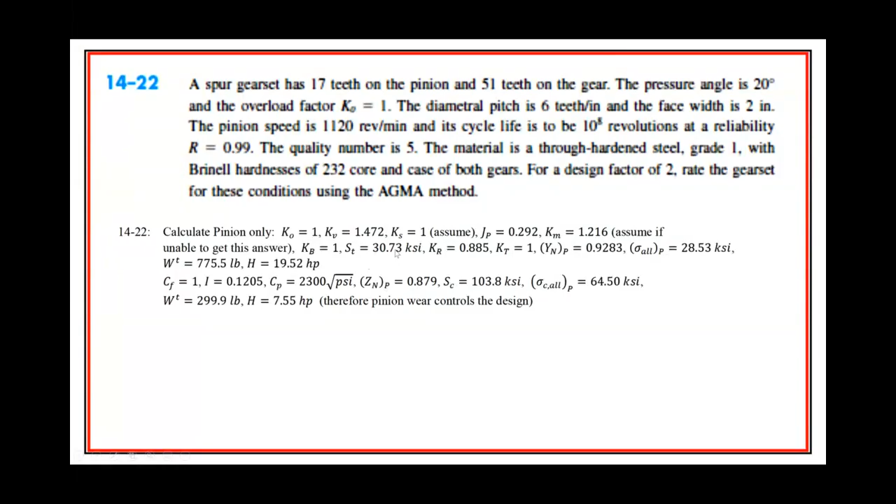So I'm only going to do the bending one. And by the way, these are like in-between numbers that I've provided as part of this. So we would actually go through and use the book and go through the process here, onto the section.

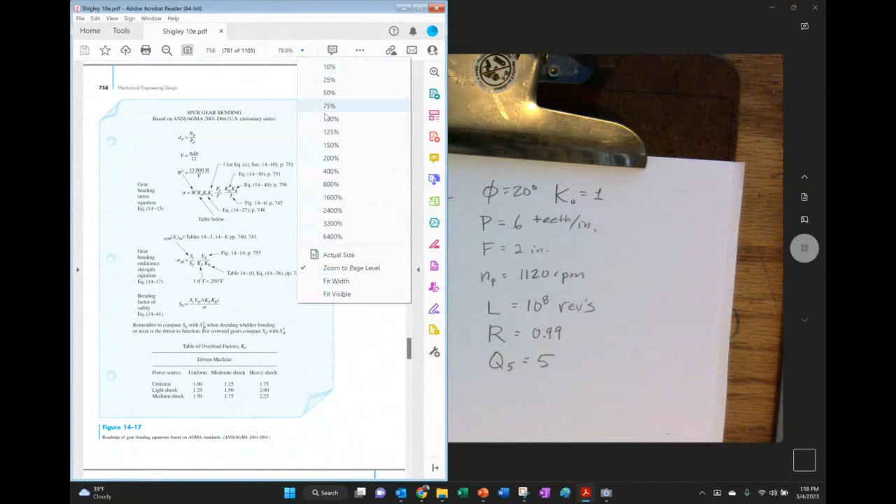And of course you were going to go, see, I think if I could dual screen, or I can just set it up to the side. Can I do that? Let me see. Set up to the side? Sure, I can't really quite see that very well. We'll zoom in. Oh darn, sorry. Down here somewhere, where'd you go? Should be like somewhere in here. Oh, analysis, there you go. Move you this around.

All right, so we'll write down our main equation here. Sigma equals WT, KO, KV, KS, PD over F, and then K looks like that's KM, KB, and then J, right?

And there's a little bit of like which one should we do first? I should also write down this guy right here, my allowable, because we're going to set these equal to each other. So sigma allow is going to be equal to ST times YN divided by SF, KT and KR.

I've decided that I'm only going to do this for this example because we want to do other examples. Because like I said, these are really long. It's a long problem if you want to do it, but you'd also have to do this for the pinion and the gear. So let's just do the pinion only. Are we okay with that?

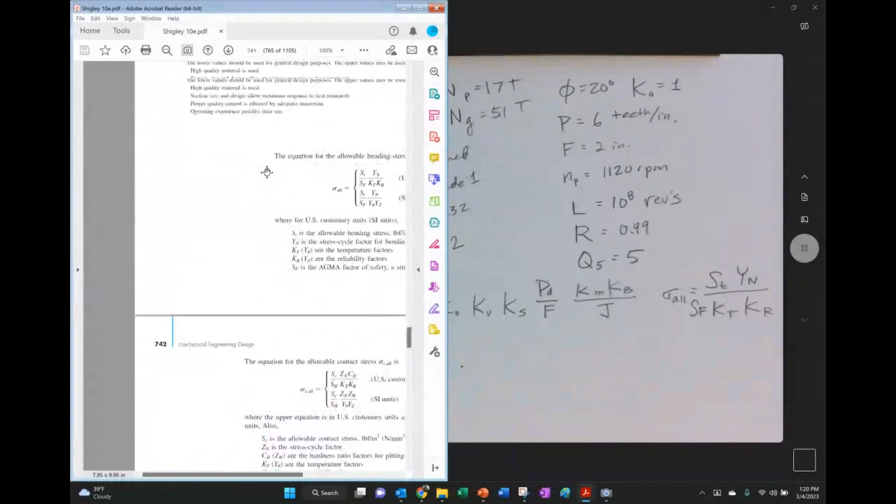So let's start out with the ST, let's look him up. Good place to start. Whoop, did I go too far? No, somehow I started going backwards for some reason. And we have to pick the right one from here. That's the contact one.

Of course you're not going to do this during an exam, but if you were to need to do this, generally I would say the procedure is to consult this table so that you're able to figure out which graph you would want to use. I can't remember what we said, it was a through hardened steel grade 1. I think they had through hardened, they say to use, and here's grade 1, so use figure 14.2. I don't think they say anything about the flame induction or carburized or nitrided, so we're really just going to look at 14.2.

So on the exam, which values will you be expecting us to be looking through or trying to find for this equation? I don't know yet, I haven't written the exam. So I mean, you could take a look at older exams, although you should recognize that in some of those older exams I think I make a mark by it. Some were for just the order in which it is. Sometimes the second exam in many classes I do like this, I make it a take-home exam, and some of them are longer problems than you could do during an exam.

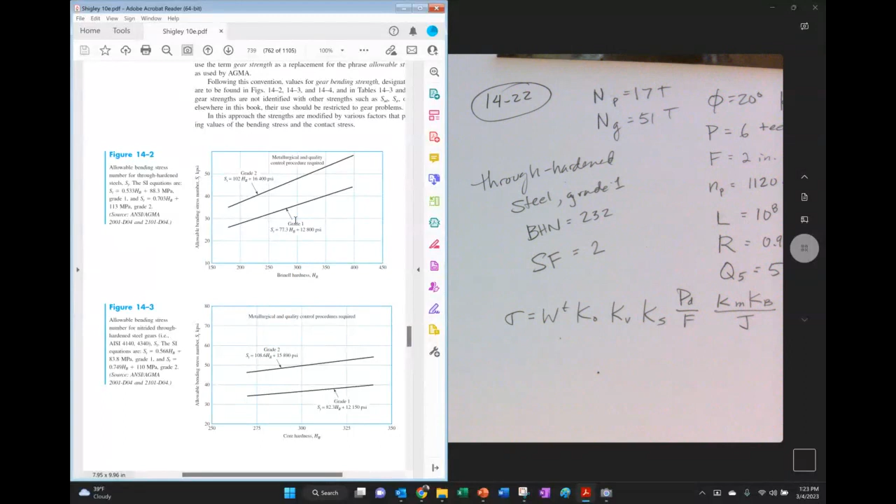So I'm going to write that equation down. Unfortunately, I'm not keeping my notes as organized as I'd like, but I'll squeeze them in here. That's the ST, we're going to have 77.3 times HB plus 12,800, right? We were told that our Brinell hardness number was 232. So 232 plus 12,800.

Can you just convert those values in front of 77.3, the hardness number, to PSI? Because in the 11th edition they have it in megapascals for some reason. Really? Yeah, same figure number, same graph, just with curves in megapascals. That sucks. Well, I guess I won't ask that on the exam then.

So, 19,214 psi, or 19.2 ksi. Okay, so we're going to go for YN. I'm not taking the most efficient route here because YN is, I believe, near the end of this, we're jumping back and forth. YN right here, and I'm just going to go for the pinion.

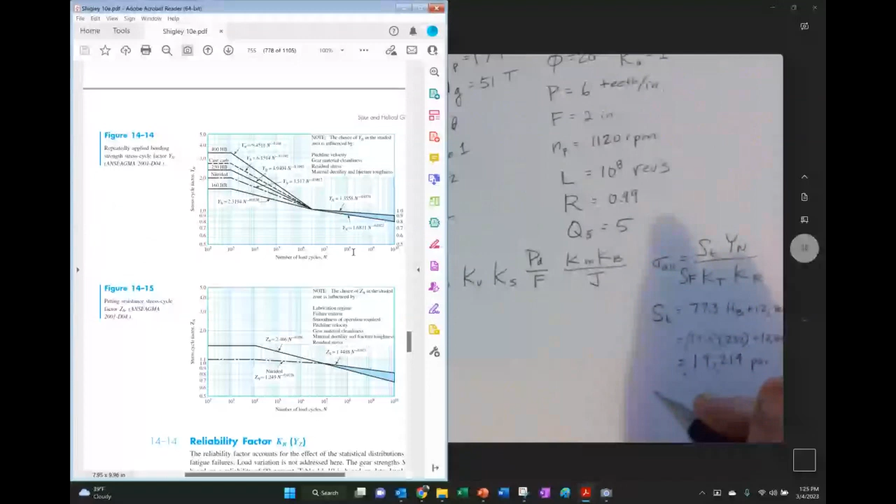As we've noted before, these are engineering judgment things, maybe based on experience, but also getting too tied up in 'what happens if I pick this one instead of that one' isn't really helpful, because things like the overload factor, if we weren't told that, could have vastly changed the results just by making an engineering decision on that. So these little nuances maybe put it in perspective.

Negative 0.0323. And so if we shove in our number of 10 to the 8 — that's not 108 — we get 1E8, raise it to negative 0.0323, multiply it by 1.6831, and we get an exciting 0.9283.

The other two things, the KT and the KR. The KR is the reliability factor, we can just look it up, so you see 0.99, therefore it equals 1. The temperature, we can just assume equal to 1. Let's say that it's 250 degrees. That's good by me, cool.

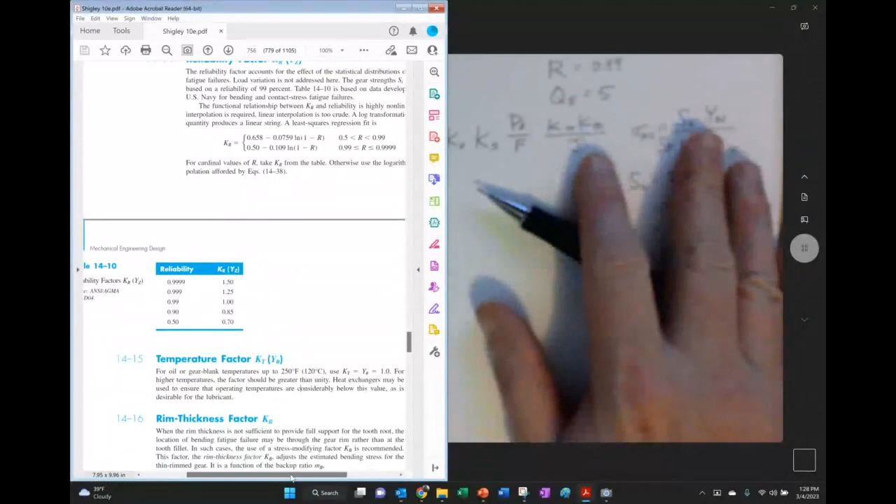Focus. Why aren't you focusing? What's wrong with it? Technology hates me lately. Not everything's about you. There, oh there you go. Okay, we're coming back, can we?

All right, so we come back over onto this other side here. We're going to set that equal right there when we get to it. Okay, so KO, we were already told that was equal to 1. We need KV. On an exam, do not try to use the equations. If you use the equations and you run out of time, it's your own fault.

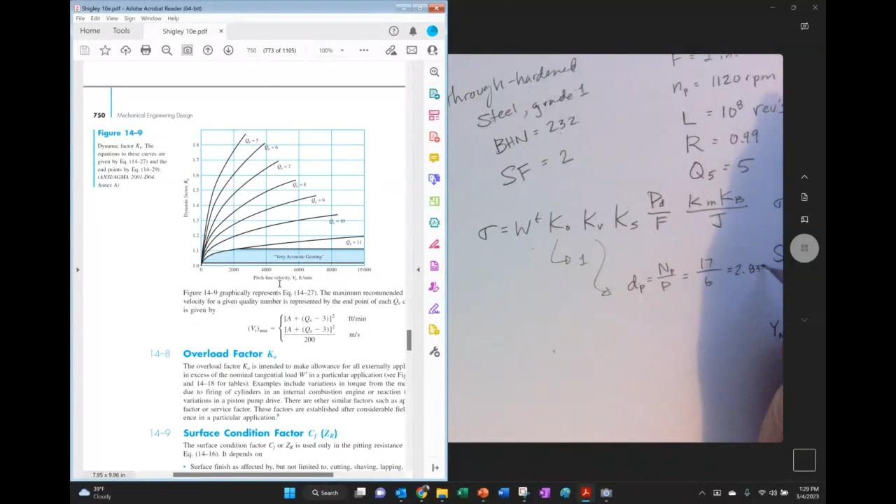What you do is get the pitch line velocity. So one good thing to start with, a lot of times we'd want to know, need to know, should we? Well, I guess get the diameter first, get the pinion diameter. So that's going to be 17 divided by 6, 2.833 inches. So our pitch line velocity, which might actually, I think they have on the funny blue page right here — yeah they do, they give you the equation for the pitch line velocity. Kind of nice of them.

So pi times 2.833, and we said it's 1,120 RPM, put it underneath there. So 1120 times pi times 12, divided, and we get 830.8, which is kind of slow, feet per minute. So we can kind of expect a low KV.

The dog has joined us. The dog is here. We should take a dog break.

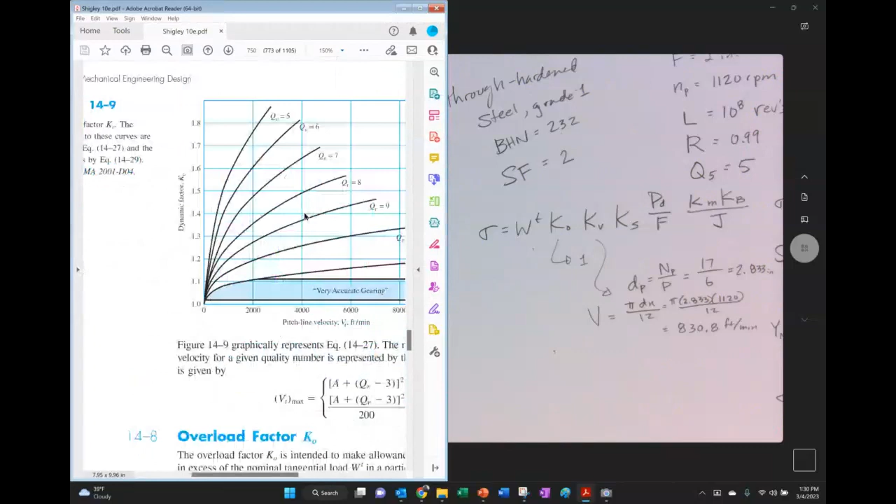This is kind of a tough one to read, but I don't want you on an exam to use the equations—don't use the equations, you're going to be wasting time. Just do your best. There's 1,000 right there, there's 800, and we were told it was a Q of 5. So what do you think? 1.55?

We're going to take a vote. It looks to me like this is about halfway right there, that's about 1,000, so kind of right down in there. I think 1.55.

And to cover my tail, when my boss says 'did you calculate this?' No, I just looked it up. I put the little squiggles in there, squiggle eagles. So we got that going for us, which is nice.

The Caddyshack. Size factor.

How many of you are going to start trying to go through this equation right here? How many of you will? But then it always says you may set this right here—that's all you needed to read, just read one line down. Even below it says use KS equals 1. I don't know what they're talking about, but if KS is less than 1, use KS equals 1. There's a whole lot of reasons to use KS equals 1. Let's use

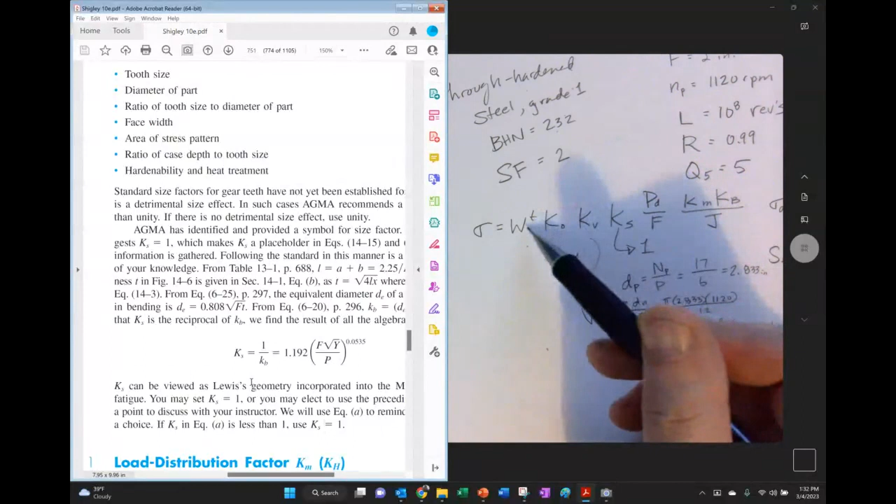1. So we have, so far, everything covered. We know this. We need KM and KB and J. That's all we have left to do.

So we go find KM, and we recall what a tedious process this would be to get all of these C's. So you can be assured that Dr. Deal will either give you KM or tell you KM is equal to 1, because I'm not going to make you go through this process. For one thing, we don't know a lot of these things, right?

It's all about where the gear is on the shaft, right? So let's just not even worry about it. The load distribution factor, 1.

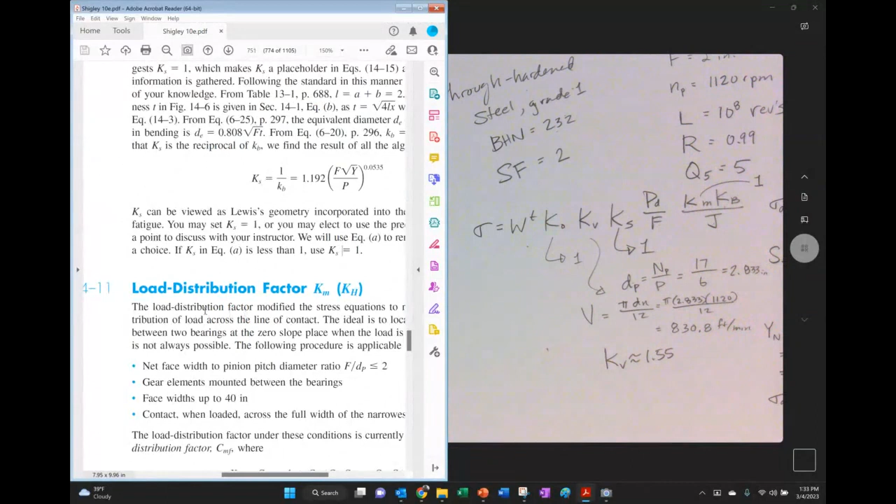And then we got the rim factor, which is KB—I think that's my recollection. Let's see if that's true. Hardness ratio doesn't apply, it must be up higher. Yeah, why would they make that easy on us? Put in that place—why would they?

Okay, so let's just note that it's the rim factor, and we're going to set it equal to 1. It too is going to be 1.

So all we have left is J, and we remember that we have 17 teeth and 51, but we're doing this for the pinion, so I'm going to write down what the J is right here. We're going to do 17 teeth, and darn, 51 doesn't even intersect.

So what we're going to do is just use where this intersects right here. I bet if we were to read down in the instructions for this chart, like below 17 teeth or something along those lines, it would say just pick where it runs into the line or something along those lines, I think. I don't know. But that's what we're going to do.

So it looks to me, guesstimating, that's going to be 0.295. You can call it 0.29, I'll accept 0.29. Doesn't matter to me.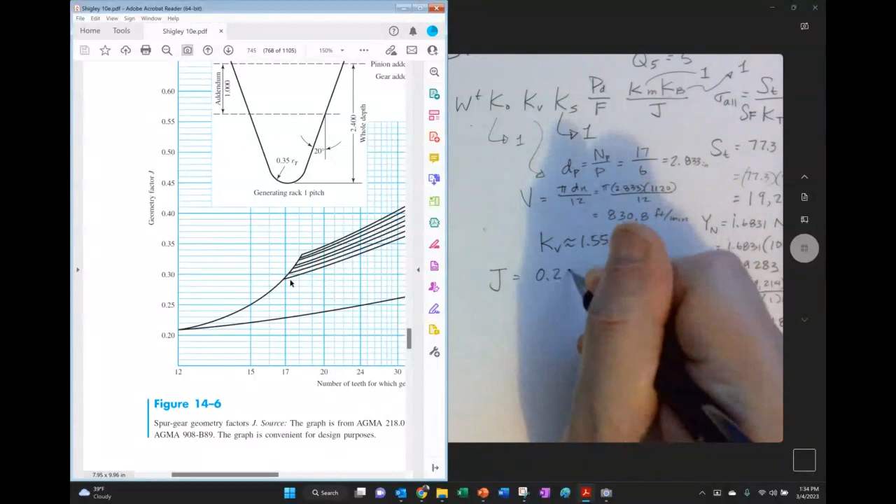So we had everything we need, I think we can put this aside. Go back to the full page and write this out where we have 8,918 equals WT times 1 times 1.55. The pitch was 6, the face width is 2. The KM is 1, KB is 1, and the J is 0.295.

So we have ourselves 8,918 divided by 1.55 multiplied by 2 divided by 6 and multiplied by 0.295. Boom.

So we have 565.8 pounds. And so if we want the power out of that, we can find H is 33,000—I think it's even on the wonderful little blue page. I go too far—there you go.

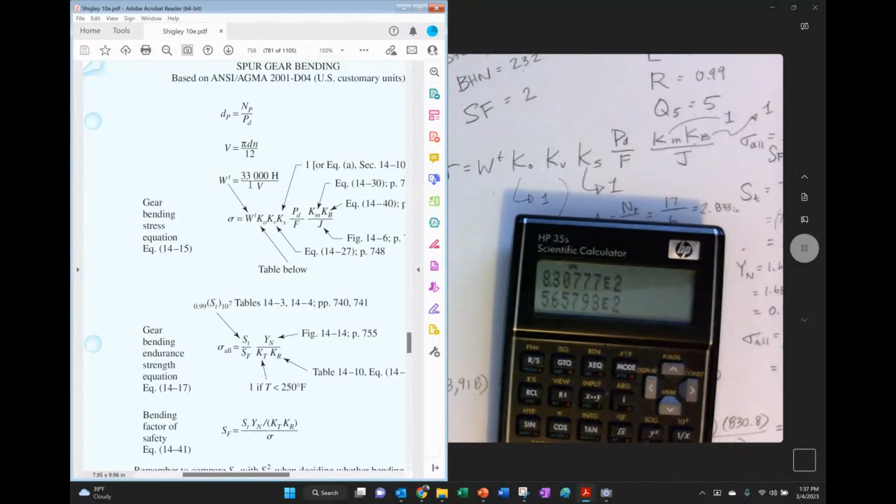The magic of the Hewlett-Packard calculator is that when you do engineering calculations, the numbers just kind of work out. So I just go times 33,000, boom, and that's 14.24 horsepower. That's why I can.

So I think it's the TI-89. That's why students take so long. That's my new theory - students can't finish exams because the TI-89 has too many buttons to hit. This reduces your buttons by about 25% of the number you have to hit.

Trust me, you go fast. And you get all kinds of street cred as an engineer for an HP. There you go, HP 35S. Just saying. I had a professor that convinced me HP is where to go. Her name is Aline Chubb. She convinced me.

All right, so we did an AGMA. Let's do a bearing thing. We haven't done any bearing things. What do you say? Yay? Nay? Sounds good to me. All right, cool.

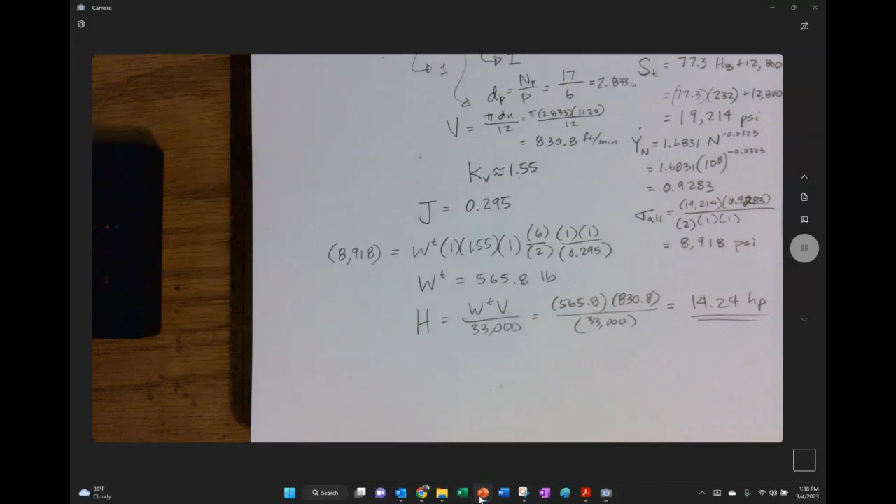Some of these I hate. There's a couple of these problems - I'm having flashbacks, I recall I didn't like them. I really need to get rid of the answer right there, because we should see what the answer is. I'm trying to think about the ones I didn't like. There were conceptual problems that boggle your mind. Just want to stay away from them. That's what I'm gonna do.

All right, it's in chapter 11, right? Some of these are just plugging and chugging. Doesn't make for a great question.

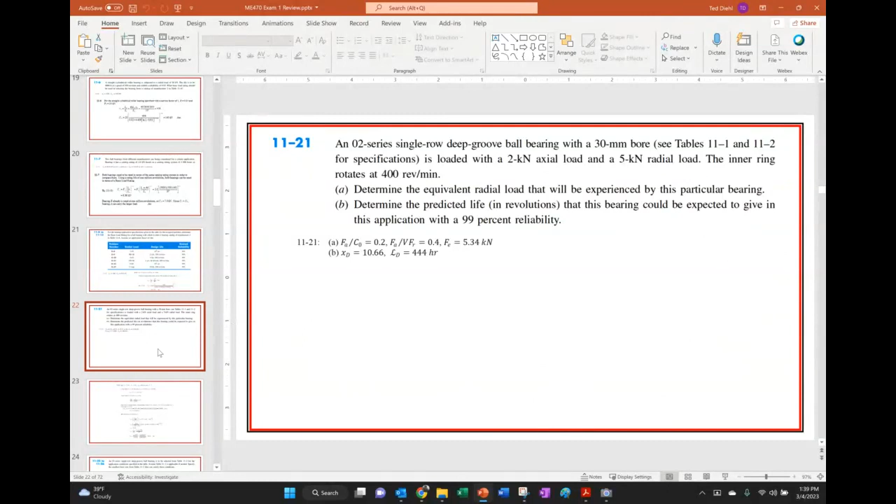All right, let's try this one. No, that's got an axial - we don't want to do the axial one, that takes too long. Just pick one of these, I don't care. Let's pick problem 1112... nah, 1113. Go 1113. Problem 1113.

Where we have 11 kips - I don't like kips, 11,000 pounds is what they mean. So here's my FD, we'll call it, and we got an L of 20,000 hours. And again, RPM of 200 RPM, and our desired reliability is 99%. So for the bearing load application specification in the table for the assigned problem, determine the basic load rating for a ball bearing with which to enter a bearing catalog of manufacturer 2 in table 11.6. Assume an application factor of 1.

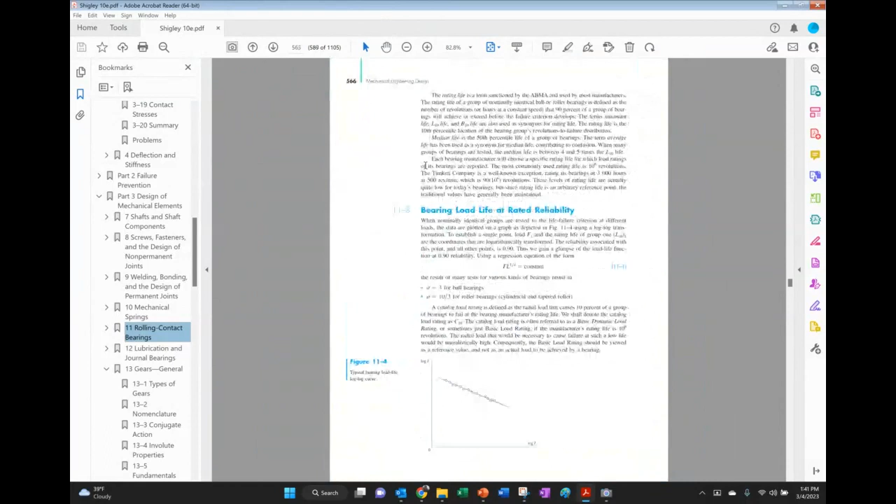So this is a pretty straightforward problem, right? Go to our bearing section here... still bearings. And we got a reliability thing here. So our best bet is to go with this equation right here - this is the one I like. I'll write that one down.

C10 is equal to AF, FD, times XD divided by XO plus theta minus XO times the natural log of 1 over the desired reliability, close bracket, raised to the 1 over B, and to the 1 over A.

And now I need to get these little factor things. What's the difference between the ln one and the one where you're not using ln? Where's 1 minus RD or just the ln version? This is for people who don't have a natural log on their calculator, because it was back in 1980 or so, I don't know - or nobody's calculator had a natural log on it. And people who were getting the Radio Shack calculators with solar powered - if you're lucky, you had a square root on it. Because times are changing.

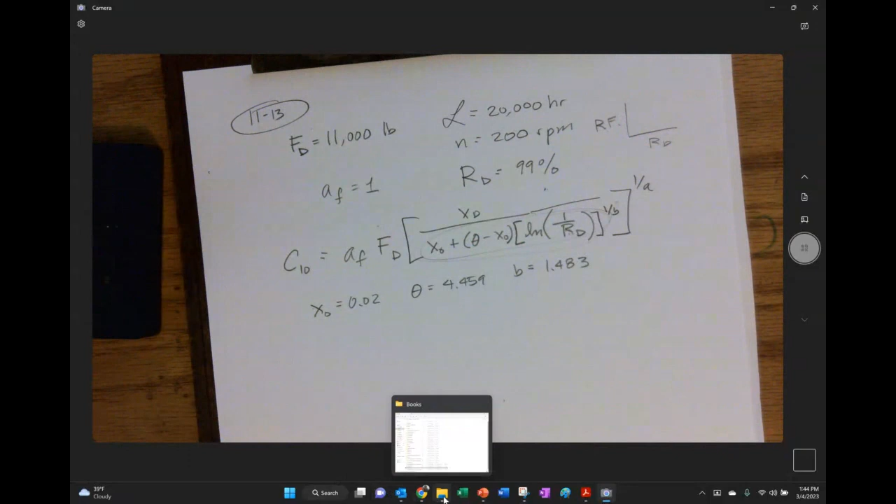in old exams. So let's see here. Let's see from... oh, I haven't done an exam, I didn't look at the old exams. Let's go Fall 19. I don't know which exam it's going to be. Exam 1.

On the video, you could stop and pause right on top of this as I fly by these questions, and you can find new questions right here.

That's generally what I'll do right there. So if you had 95% reliability, you find that 0.6 is the reliability factor, instead of having to go through this pain right here. But let's do that as we're coming through here.

So we got an application factor of 1. We have 11,000, so we need to look that up. Good to know where stuff is in the book. So come back into the appendices. I wish they had the little bookmarks in the appendices. Useful tables. But they have a conversion factor thing right in here if you needed it.

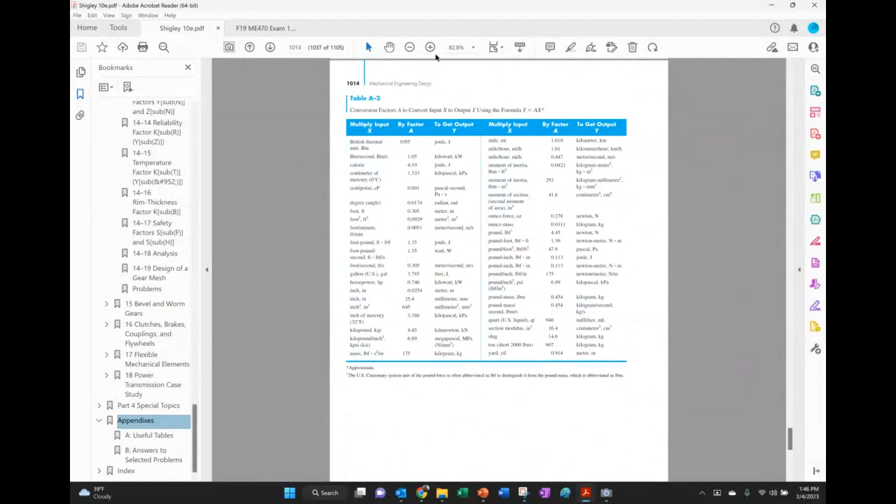And we want to go, let's see, multiply pounds to get a newton. So we need 4.48, 4.45. It's actually 4.448 is what people usually use right here. And then we have to divide by 1,000. So we go 11,000 times 4.45, because that's what they said, and then divide by 1,000. And that's going to get us in kilonewtons. So happy day.

We also need an XD. I guess I could do that over to the side. If I would have been more organized, I would have recognized that I needed to do that. It says we need an LD, which is going to be—let's look up the equation. I know we don't have to look up the equation, but let's look up the equation anyway, because I think Osama would ask me where I got the equation from if I just wrote it. I don't know, is that presuming too much?

Right there. Boom. There's the equation we're going to look at. We could also just rationalize it out. That's like, okay, we have this many hours and we know the RPM, so we can turn it into, instead of revolutions per minute, revolutions per hour or something like that. Yeah, 60 minutes per hour. So 60 times L times N. So it's 60 times 20,000 times 200.

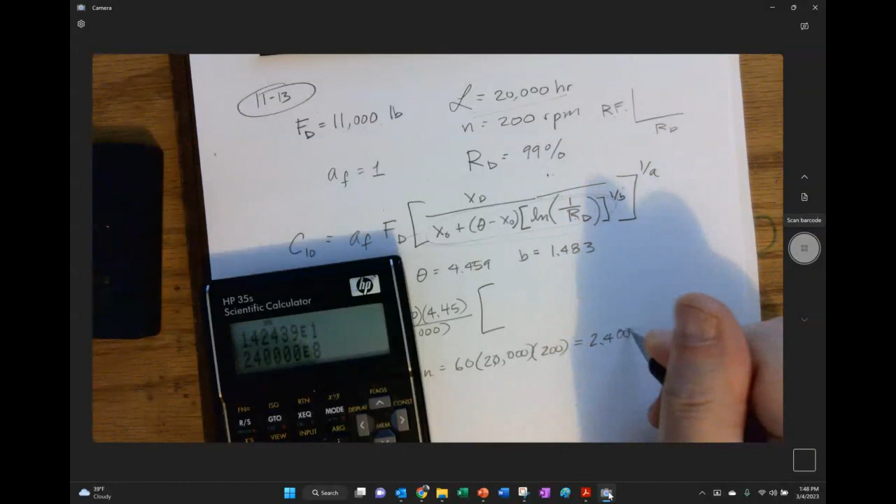Turn it on, begin. So we get 2.4 e to the 8 revs. So our XD is going to be our LD over the manufacturer's rating. There's manufacturer 2, so that's just going to be 2.4 E8 over 1 E6. Do that in our heads—but I did it on my calculator anyway. 240 is our ratio, so put it in here, 240.

And then start with this monkey business. 4.459 minus 0.02, natural log. Sounds good, like a good thing, right? It's a natural, that's just natural. Oh, did I actually look at the wrong thing? I know I looked at 95. I think we need to look at 99. See, we got to see what our goal is again. 99. Ooh, wow, that's like 0.2 something. We're about to find out.

And then raised to the 1 over 1.483, and then A for ball bearing is 3. Boom. Okay, so let me just calculate what I am calling the reliability factor right there. I'm going to do that first just to check it out and see if it makes sense.

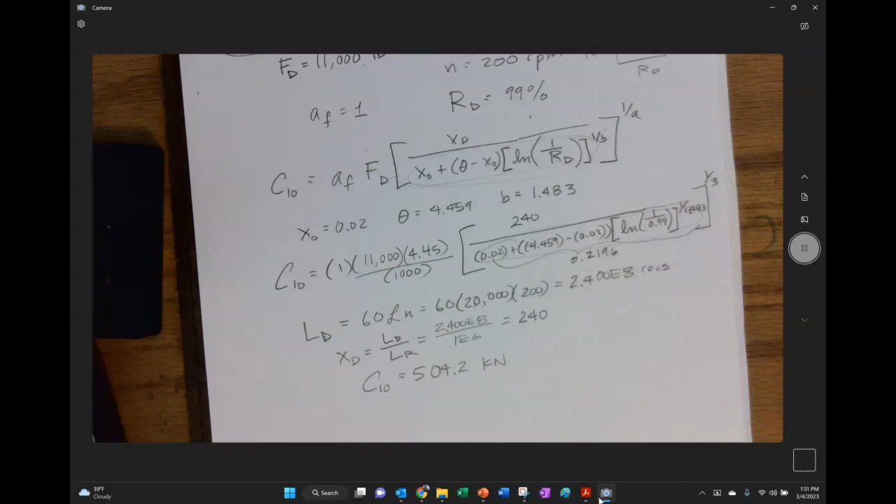So 10.3 times our 11,000, times 4.45, and divided by 1,000, and we get a lot. That's a big one. C10 is equal to 504.2. I'm not certain I didn't make a mistake somewhere along the way. That seems like a pretty big number. So I don't think we'd be able to find that in our catalog.

Not in our fake catalog here. Is the fake catalog here? Yeah, that's way too large, we can't find that. What about here? Oh, we might be able to. Yeah, look, we could if we would need to use like an 02 series, 03 series roller bearing, right, somewhere like right in there.

Because that's a large number. But anyway, that's the way we would proceed. So pluggy and chuggy.

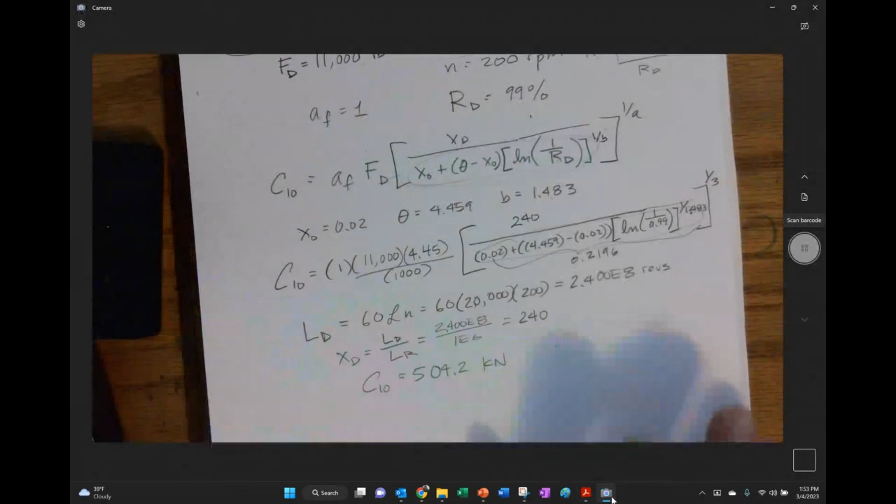We got requests, we got another 8 minutes or so. I had a question about this process. When we find our C10, I was watching one of the lectures for that, the one class I missed, and I saw that we repeated the process to get the smallest bore size that we could. How do we know how many iterations to do, and when do we know if it's a good bore size or not?

All right, so the one you're referring to is when we have an axial component, I'm pretty sure. Because we don't need to do iterations unless we have to find a way to combine the axial with the radial to get an equivalent thing here. I would say the number of iterations is really just dependent on you having a pretty good amount of confidence that if you did another iteration, you wouldn't get a different result. It's not something I would ask on an exam because it just takes too much time.

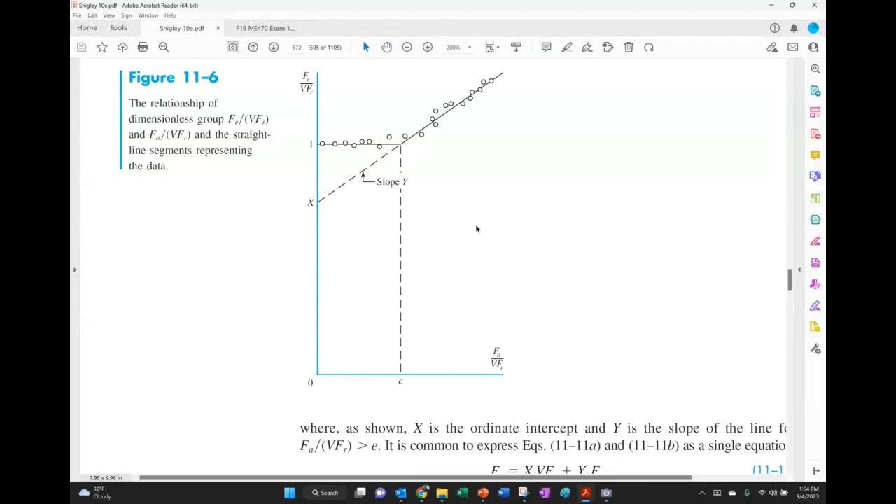But going back to what the concept is, quite simply, it's an apples to apples thing, another instance of apples to apples, in that the manufacturer is giving you a rated load that's only based on radial loads. So they're giving you a method to convert your axial load and radial load into an equivalent radial load only thing. And by way of empirical

values over enough bearings being broken in their little bearing testing unit, they found that there's a correlation down here. It unfortunately is tied to the ratio of the axial load to the bearing's static load rating, that's C0, that's also in there.

So in order to find this, you know the process, where you have to pick a bearing maybe to start with, or another way to do it is just to ignore the axial load and then find what rating you have, go to the catalog and use that bearing, or maybe even just use the next bearing up, might make more sense.

And then go through and size check, you go through this process right here, which mostly consists of finding what this Y is going to be that you're going to put up into here, so you can find this equivalent load. Shove that equivalent load into the thing that we just did, except you'd put it in right there.

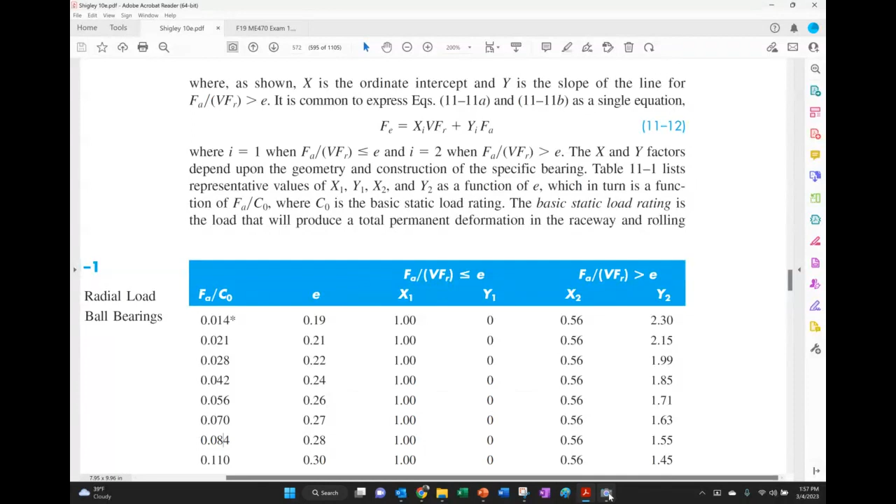But I'm not asking that question on the exam. Gotcha, thank you. You're welcome.

All right, so I'm a little burned out here. I'm gonna call it, I know we got 2 minutes left. I hope this was helpful.

There are videos from, I think, 2 other sessions, spring 2020, spring 2021. I don't know what happened to spring 2022. I'm pretty sure I did one. Oh, that might have been nobody showed up. I think maybe nobody showed up. I actually had no-shows, but I did it in person on a Friday, so it's my own fault maybe. I guess nobody could make it, so I was like, all right, cool.